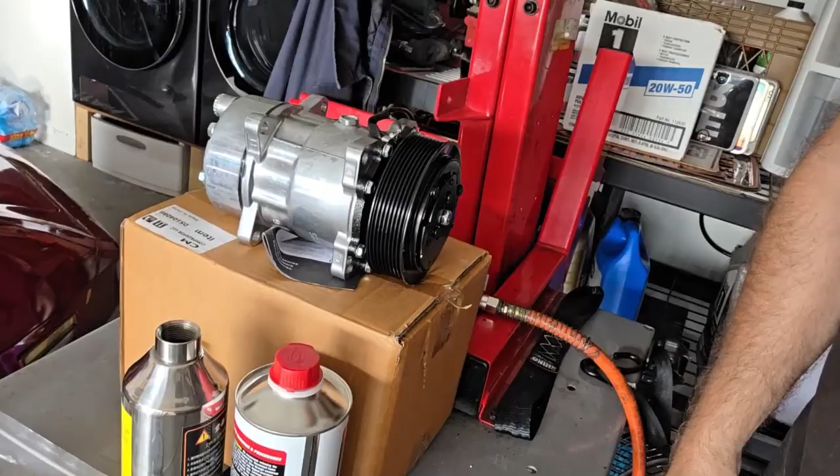Oh yeah, and we got some more stuff coming up. You notice I'm starting to accumulate parts. The AC compressor died, so I've got a new one. It's a Sanden 7H15, I think is the nomenclature. I had an SD508 on it, and it just couldn't take the RPM, and it crapped out. And so I've got a new 7 series Sanden going to go in.

What else we got? AC stuff, some minor bric-a-brac. So we'll have some more videos coming soon.

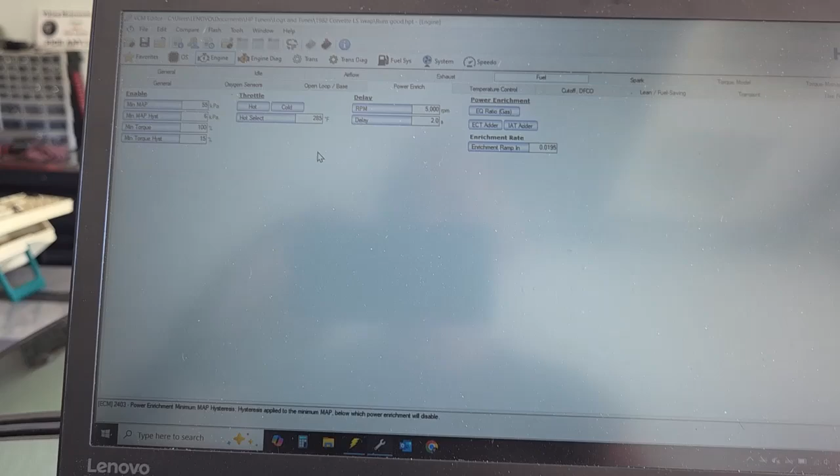Where is power enrichment? Coming in at 55 kPa MAP, which is fine. Oh, and actually you want to see this at 90% throttle before power enrichment was activated. And you want to run off the cold throttle enrichment table, which is the same. So this is the factory table from the truck. I had to get to 90% throttle before I was tipping in power enrichment at any RPM. So that means essentially I was running no power enrichment until I pegged the throttle.

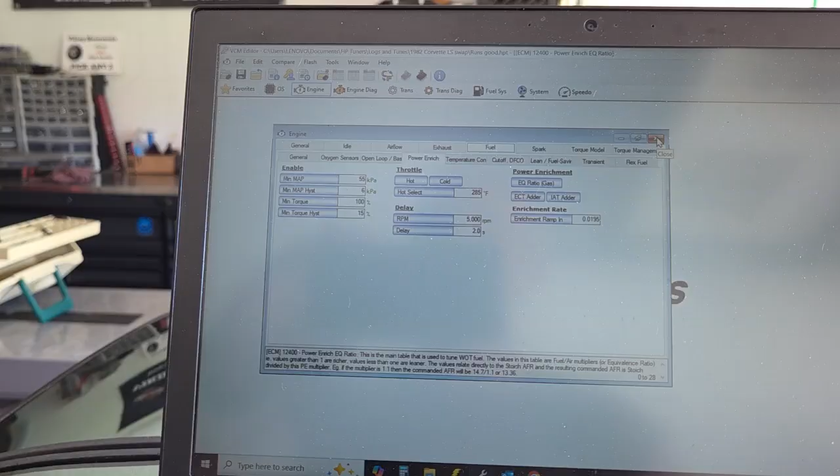And I had EQ set up, which basically is your mixture based off EQ, 1.48 up to 1.3, which will richen it up as the RPM comes up. My stoich is set to 14.2 because I occasionally run alcohol, ethanol-aided fuels here in Florida. You get it, and I don't want to worry about having to swing back and forth. If I run 14.7, then if I run alcohol-based fuels, it'll kind of run lean. And so what I did for the new tune

is basically you go in, and the MAF is still live here, but it's not going to look at it because I've disabled it. The way you do that is you go into engine diagnostics, mass airflow sensor, and have it fail at 100 Hertz. So basically, as soon as the motor starts, it's going to fail the mass airflow sensor.

And what you need to do in addition to that is go in, and these top 3 DTCs, 101, 102, and 103, all need to fail on first error. So as soon as you start, it fails the MAF, and it immediately reverts back to the VE table only. If you don't have this on first error, you'd have to cycle it twice. It just saves a lot of time to have these set to fail on first error. I also turned off SES enable, that way it doesn't turn the check engine light on. So if I have a different problem going on while I'm on a run, it'll still turn the check engine light on, but I'm not going to have it looking at me the whole time.

Going in their fuel, I turned off deceleration fuel cutoff. It doesn't enable to 284 degrees, so that'll never turn on. Power enrichment is still on. Long-term fuel trims are shut off. Notice in enable, minimum ECT is 284, so they're not going to. Long-term trims are shut off. Short-term trims are disabled. Short-term fuel trim in open loop is disabled.

What else we got? If you have catalyst protection on, you need to make sure that's disabled. I'm not running CAT, so that stays disabled on mine. So basically, if you cut off your deceleration fuel cutoff, you shut off the oxygen sensors, leave it in open loop, and you disable the MAF, it'll run straight VE.

And then when you go in and do a test run, do a log with it running off just the straight VE table, you can monitor the wideband variance and look and see where it's rich or lean, and then make your adjustments from there.

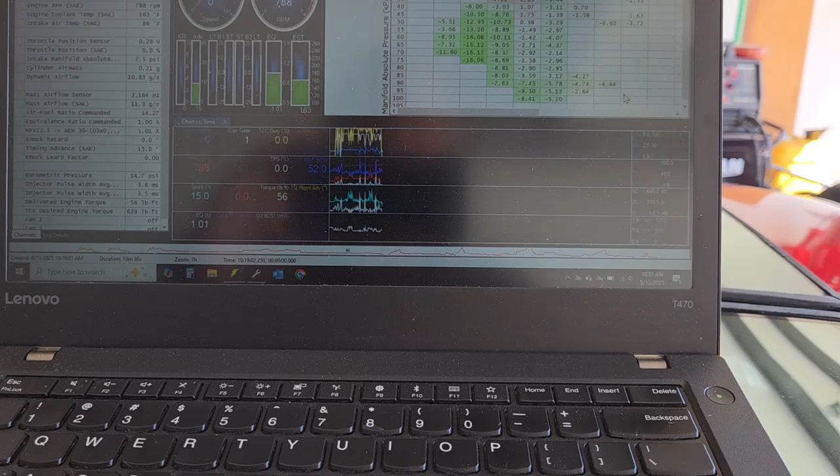So I've dropped the IFR and the injector flow rate tables down, and as you can see, I'm now way rich, which is exactly what I wanted. And this is right on that big peak on my VE table. And then of course it climbs up a little bit. Now I didn't run too high of an RPM because I didn't know if I was getting into any knock down the road, and I want to try and take this in stages.

All right, so I went ahead and moved inside because it's just ungodly hot outside already. So basically this is the log that's reading exactly like the VE table does. It's set up for MAP versus engine RPM at the exact same gradients and axis, columns and rows as the VE table itself. So we can take this data and transfer it directly into the VE table to affect it in the direction we want.

Since this is the first run with the new data in there, I'm just going to bulk all this in at the same time, and then I'll have to smooth the VE table out a bit because I didn't get a ton of coverage, but I'm pretty good up to 3,000 RPM. So these tails are going to show up, and there'll be big dips where it was too rich, so it leaned it out. So I'll have to go in and smooth some of that over, and then smooth these out to get up higher into the table margins.

And I'm not going to go into great detail about how to set up this histogram. There's enough YouTube videos on that already. Basically, you need to set it up like so. You'll see I've got engine RPM across the column axis, and then manifold absolute pressure on the row axis with the same gradients, the same steps as the VE table. And you can copy these directly in.

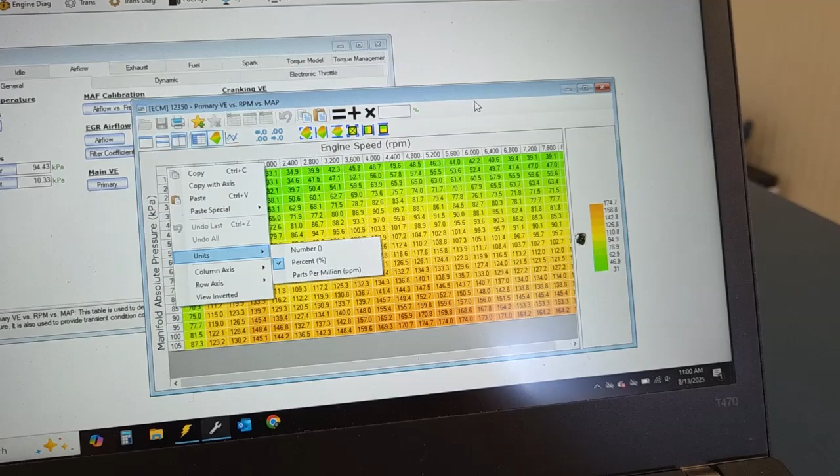If you go to the VE table, airflow, you can go right up here and copy labels. And it'll copy the exact same labels and same column data. So when you're looking at the log in VCM Scanner, you'll have stuff that relates directly to the VE table itself. You're not worried about doing any math or compensating for that.

And then of course I've got the filter set up to filter out any transients. So that way, if I'm on and off the throttle and changing throttle positions... What you want is a nice stable run when you go out for a log, because you want it to be in each RPM and in each cell as long as possible to fill the data up.

And if you click on counts, it'll show you how many times it pulled data. Oops, let me close that. So you can see I had 2,600 hits in that cell, 4,400. And as you get to the ends, as you're coming up and down in throttle, it'll thin out towards the ends. Like that only has 1, that only has 2. And so what you'll do is come up here and click on the corner, which will highlight the entire chart.

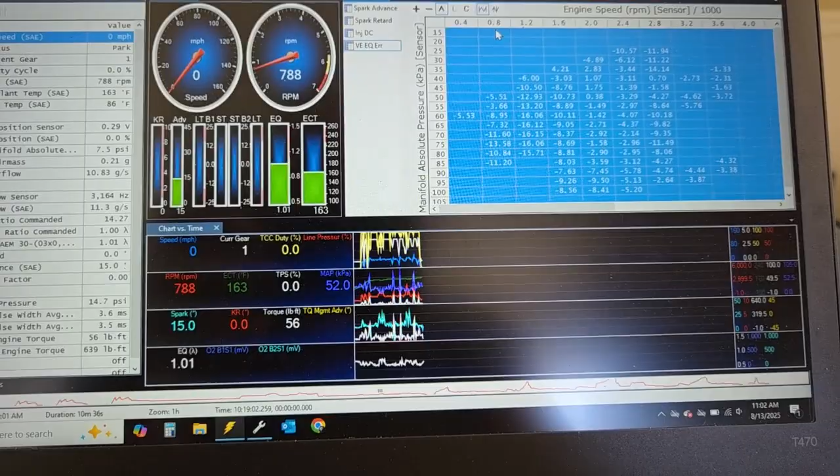Right click, copy, and then go to your VE table, and what you can do here is right click, paste special, and I'm going to multiply as a straight percentage. Another piece of advice is, as you start fine tuning and getting it close to 0 or 0.1 lean or 0.2 lean, you get it within 1% either way, consider the cell's done.

Once you start getting that close, you're getting down to 2 and 3% variance, then you'll want to multiply by half. That way you're putting small changes in. Because there's going to be barometric pressure changes and weather changes, humidity is going to be coming up and down. That's going to affect your reading. So you're never going to get your mixture variance, the EQ variance, to read zeros. There's always going to be some variance, so that's fine.

So once you get down to like 2 or 3% error in the VCM scanner log, you can call that done. So you'll want to move in smaller steps as you get closer to 2 and 3% variance. So you do multiply by half, and that would take the percentages from the VE log and only multiply half of that change to the table. So you'd have much more gradual changes, and you're less likely to have big swings up and down as your environmental conditions are changing, engine conditions are changing.

So I'm going to multiply this by straight percent because I know I've got to move a lot because I just changed all the injector data, and you'll see what it does to the table. Actually, what I'm going to do first is blow this out so you can see the graph change. So there was the table we started with, the 3D graph, and I'm going to paste special, multiply by percent. Bam. And you can see how much it dropped down that big peak and actually started to raise up some of that valley.

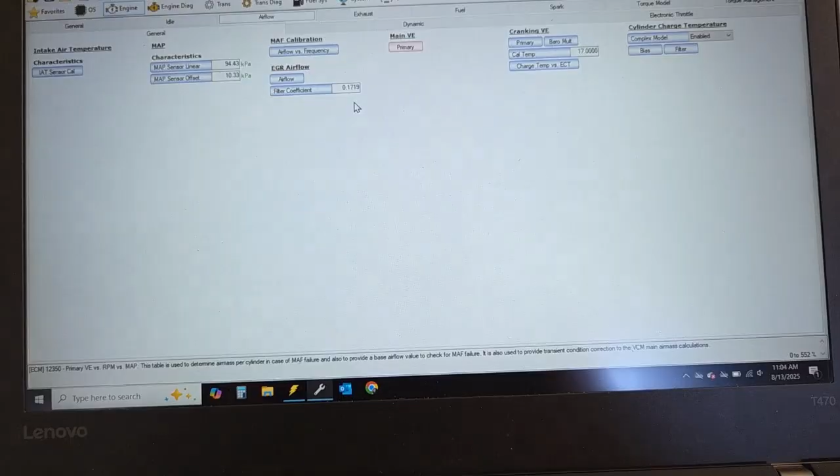I probably should have showed you this while I had that tune up. I'm going to close this for now and go back into the VE table in a second. But with power enrichment, I modified that to come in at 35% throttle. So as I'm getting heavy into throttle, it's starting to go into power enrichment. It just enables power enrichment to function. It doesn't mean it's going to enrich it up, because that's still going to be based off your EQ ratio at a preset RPM.

Oh, and the way I came up with this 1.15 on EQ ratio is your stoich, which is 14.2 I've set on this motor, divided by your desired power enrichment mixture ratio, which was 12.5. So 14.2 divided by 12.5 gets me 1.15, and what I want to see is 12.5 across the board. This EQ ratio of 1.15 is a modifier on the base EQ ratio. So this doesn't mean the EQ ratio is going to be 1.15. It means it's going to modify the stoich ratio as set.

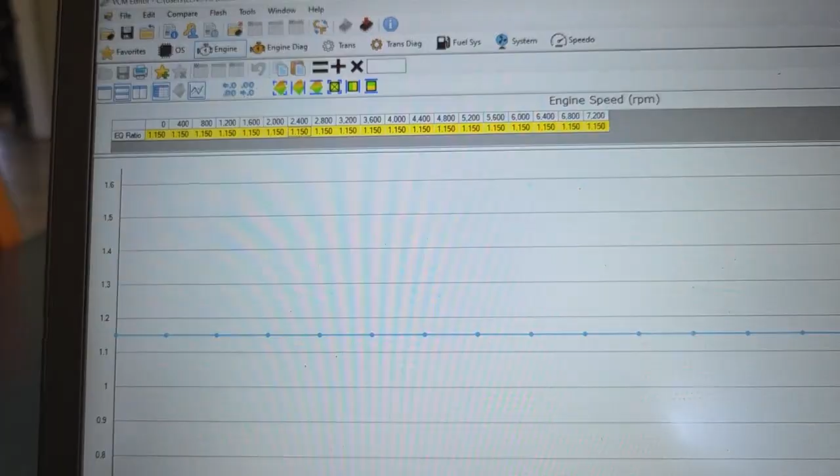So when I get into power enrichment above 35% throttle, it's going to kick in and go up to 12.5:1 instead of 14.7:1 or 14.2:1. And so that number may be different for you depending on where you have your stoich set, whether you're running alcohol or not. If you're running flex fuel with alcohol sensing, some of that's easier because that'll do the math for you. But I don't know whether I'm always going to be able to get ethanolated fuel. So I set it at 14.2, which kind of gets me in the middle.

All right, so now we'll go back into the VE table, and we've got all this chunky mess here. What you don't want are these big transitions, like a big hole here and a big jump here and a big hole here and a jump here. If you look on the chart where the pointer's moving, you can see what's happened. Here's where I just measured it on a log, and here's data that hasn't been touched yet. So obviously that needs to come down.

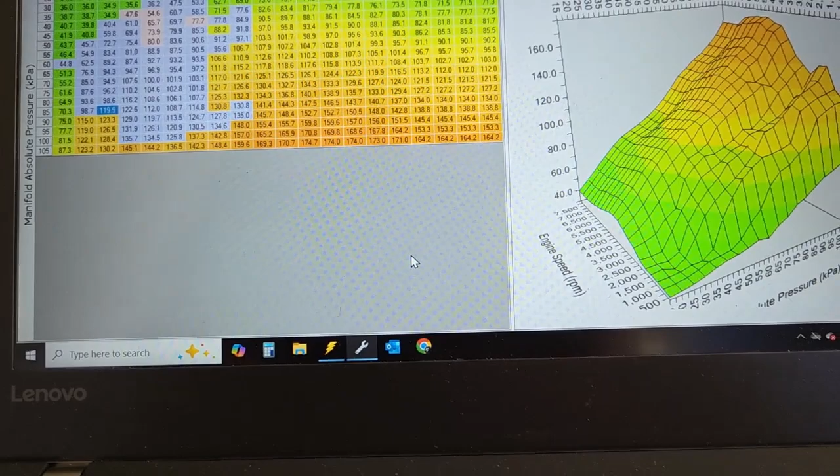So what I'm going to do is take a look and see what my percentage was like up there. 10, 15% at 1200. Let's say 12% at 800.

So I want to take 12% off at 800. So I'm going to multiply this group of boxes by 0.88, which will be a 12% deduction. And if you saw me key that in, let me go backwards. I think I dipped the camera down. So I'm going to go up here.

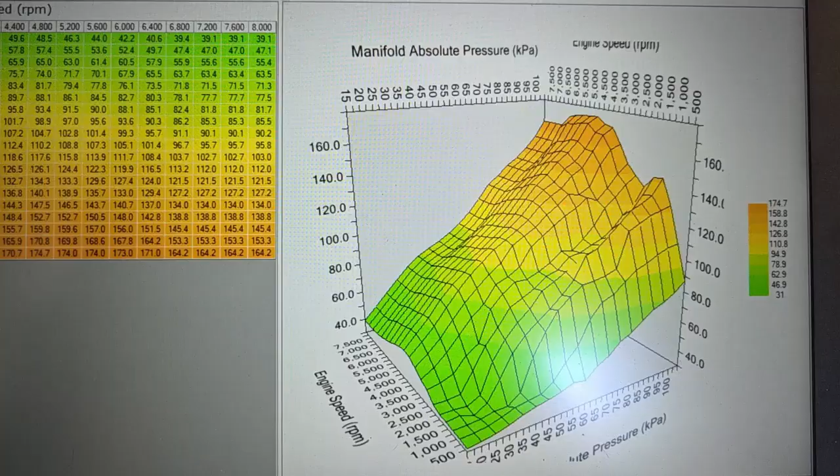I highlighted the 4 cells that I want to move, and I know I need to take about 12% off of that. So I'm going to go 0.88, which will take 12% off what it's starting from, and multiply. Boop, and that will drop that down. And you can see what it did here. It flattened that out. If I reverse it, I'll give you another graphic. Here's what it looked like to start with. And then multiplying it by 0.88 dropped it down in line with the one before it.

And the same thing with the cells before that in the next range, 1200 RPM. It looks like we were 15 or 16% rich. I'll take 15% off of that. So of course that's going to be 0.85. We'll go over here. And again, we'll see the chart drop down once I multiply it. Bam. So now we're starting to see more normal numbers down here. It's coming way down.

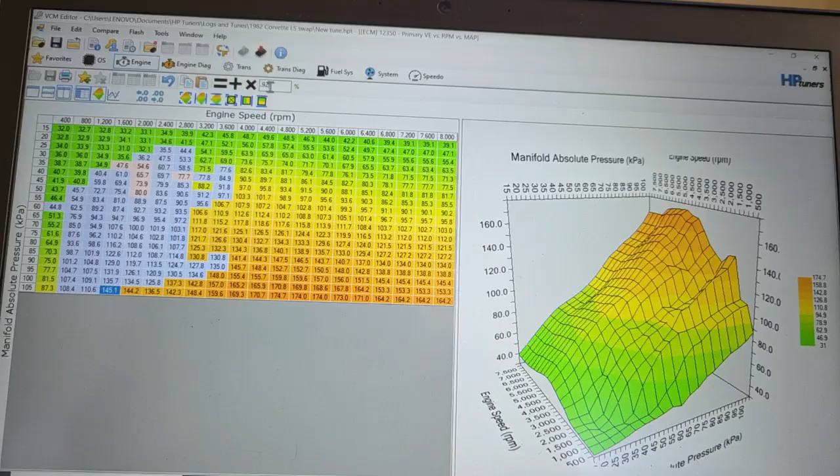And as I go back and do runs, some of this will come back up, some of it will go back down. 1600 RPM was down by about, let's say 8.5. Let's say 8%. Back this off so I can see over it. 2000, about the same. So I'm just taking 8% off of these guys.

And that top bar, I don't think I ever hit 105 and rarely hit the 100 bar. So those were kind of speculative. You look at the trend as it's coming up, and then I'd filter it in the next two. I'd carry it up and interpolate it up. And what do we got? 24 is about 5%. 28 and up look to be about 3% is probably a good place to be. So 5% and 3%.

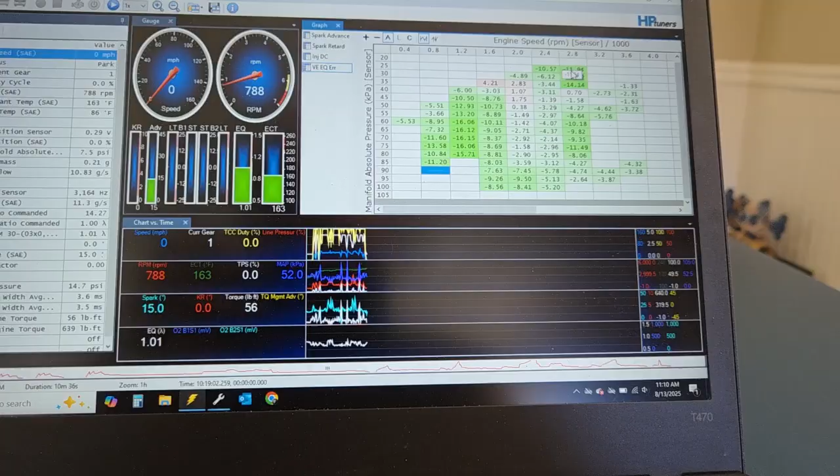So you see it's starting to drop that down now. I'm going to fill these guys in. Where else were we lacking? It looks like I'm probably going to pull 5% off the 400 RPM table and then down below here as well. Most of this is way rich up top. This would be in deceleration fuel cutoff range, so that would be kicking in and leaning that out anyway, but the less it has to do, the leaner it's going to run, the better fuel efficiency I'll get on decel.

So obviously 2800 RPM. And is there a bunch of counts? Yeah, there's a bunch of counts in that area. So we're going to go ahead and smooth those down. And so I just went through manually and filled in all these boxes here. And now I need to fill these in right here. Again, we're looking at about 3% at 3600 in that gap, and let's say 5% at 3200. So 5% at 32 and 4% at 36.

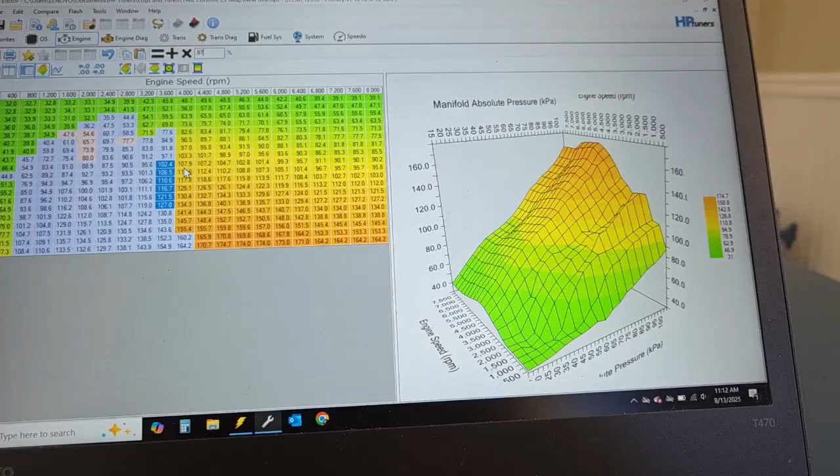I'm going to leave these fat for the time being. I may bulk drop some of the higher end stuff down because I think that's all going to come down as well. Let's go probably 97%, I think, because I'm at least 3% rich through here. So I'm going to fan that out. And then as I'm getting up to higher RPMs on my subsequent runs, I'm going to make sure I'm not running excessively lean, or I'll have to go back in and manually bump this stuff up.

And I'm just doing this particular column because it's easier to bulk edit them all. And I'm going to drop that one down. And you can see it's starting to fan down now. I'm going to take 3% off the whole rest of the chart. So we're getting down into the 160s now. So we're moving in the right direction. Ultimately, I may have to still go back in and adjust the injector flow rates down.

If anybody has any ideas on why I've got that weird valley still in here, and again, this still has to get cleaned up, but it's still a pretty pronounced valley in there, and reading way too high on VE, feel free to fire off a comment and let me know what you think.

And I think it's injector flow rate. I don't think it's starving for fuel. One thing I did always capture is injector duty cycle. And if you look, I'm getting nowhere near max duty cycle yet. I'm still only part throttle, but even at wide open, the most I had ever hit, I think, was 75 or 80% duty cycle, up towards 5,600, 6,000 RPM. It still had plenty of overhead as far as fuel flow, so it wasn't leaning out.

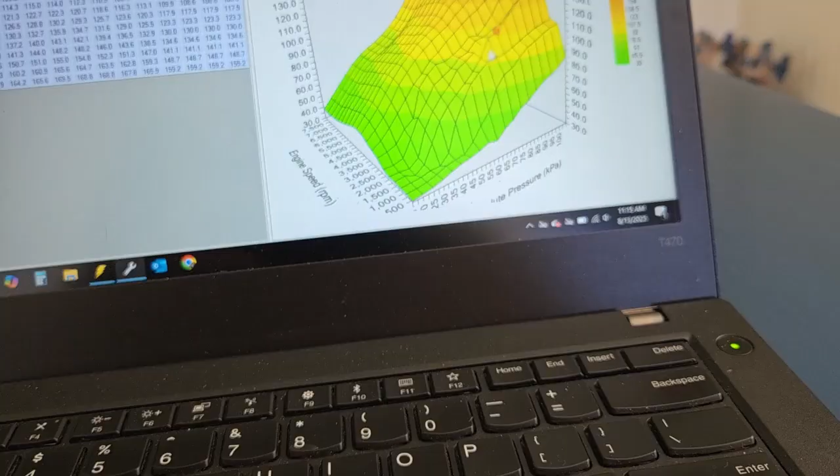So now we're back over here. We still have these big ridges on the top. So I definitely want to smooth these down, and we're looking at 1600 RPM up at the end, to 24, probably up to 3,500 RPM. And I'm just going to smooth these.

So I highlighted this section, which is going to highlight this whole area that got real data in that's kind of choppy. And I'm going to smooth this sucker out. And watch what it does to the graph. So it flattens out those big transitions, because that's what you don't want, is those little spikes that are back and forth in there. You want it to be nice and smooth.

That way, as you're on and off the throttle, you're driving, as you sit with steady throttle position, what's going to happen is as the car is speeding up and the RPM's going up, it's going to start creeping up through these cells. And what you don't want is for there to be a big transition where it goes from 87 up to 97; that would be a big jump right there.

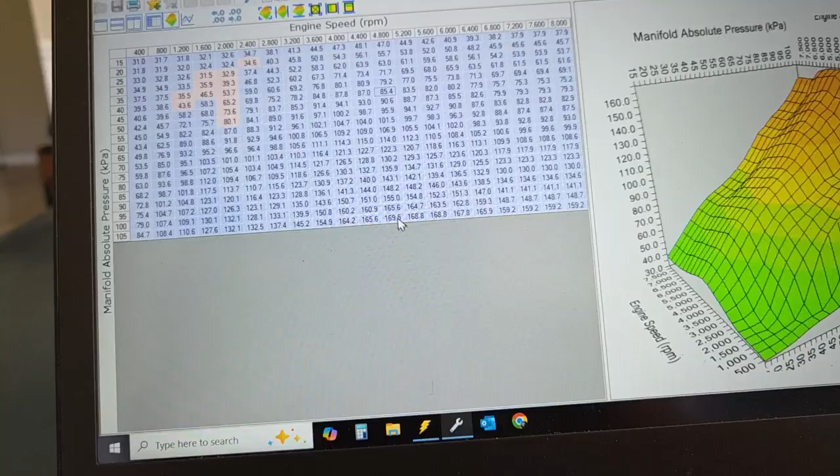As you can see, it's only one, and then it jumps by 3, it goes by 3, it goes by 5, goes by 2. As we're getting up into the power band, it'll start to flatten out. Like here, my peak fueling right now is somewhere around 4,800 RPM as it's getting up on the cam. And then once it gets up into peak efficiency, it kind of flat lines off, and then I have the mixture dropping off towards the end.

Because I'll never spin this motor to 7 grand with a stock top end on it. The most I'd spin it was like 6,500. So up to 6,500, it's still growing, and then my rev limiter would kick in and stop the ignition system, would shut it down. So I'm going to take this out. I'm going to load this back in, dump it into the ECM, take it out for another run, and rinse and repeat. And I'll touch back with you once I get it back out.

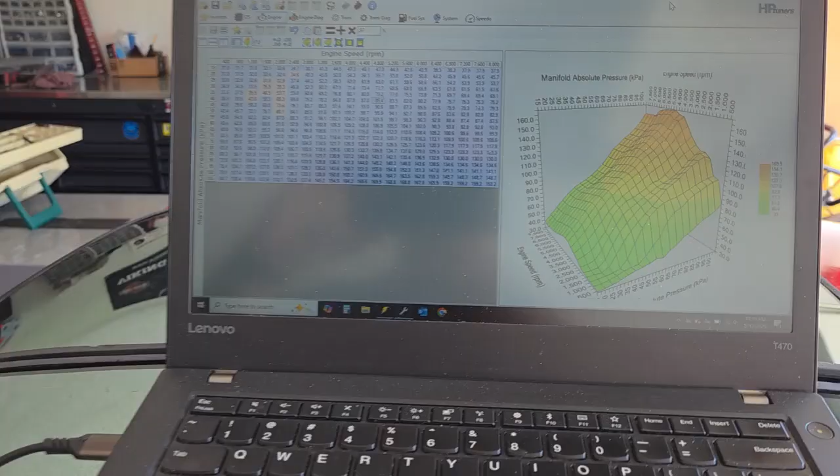Actually, I'm probably going to pause this right now, and then I'll come back in, and you can watch me upload it into the ECM, and then we'll go out for a run and see what my next log looks like. Alright, so we're back out in the garage, aka the hot box.

Something I neglected to mention before is that anytime I'm doing tuning runs, I always keep a chart, a histogram run up for spark retard to see if I'm getting any retard while I'm doing a tuning log. And I did get a little bit of retard right in there, 0.8 up to 1 degree of retard. That really isn't much of anything. I'm not concerned with that right now.

If I start seeing 2 or 3 degrees, then obviously I would go in and back off the timing table right there. There's lots of reasons that could appear. It could be false knock, could be a little bit of a lean spot in the tune. But as I'm going through the tune, you'll see it. That will move around. And as I get in higher RPM, I may see more, because of what's going to happen as I start bringing cylinder air mass back down to where it should be, my timing table,

as cylinder air mass starts to come down, I mean, I was hitting up at 108, 116, 112, and that's way too high. As I start to come down in the timing table, because it's calculating less cylinder efficiency, I'm going to start running up in timing. It wouldn't be surprising to see me start hitting a little bit of spark knock, and I'll have to go back and retouch the table.

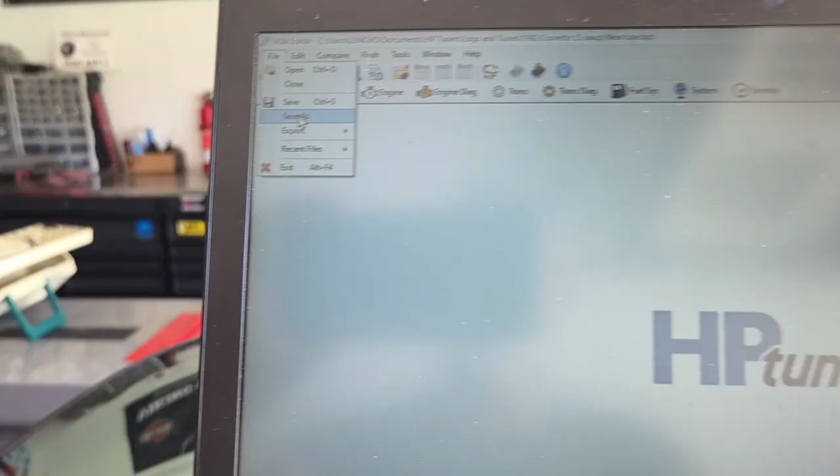But so I've got this VE table modified, and we're going to make sure we save this guy. And I'm going to make this new tune. I can't see what I'm doing because I got the camera up. New tune 1, so that'll be the first mod of the new tune. Now I'm just going to reach down and turn the key on. My USB is hooked up already. And I'm going to load the tune into the ECM.

It takes about 20 seconds to actually run the tune in, then we'll go through a cleanup, and we'll see.

Little old school Jethro Tull playing on the car radio, appropriate for an 82.

That's it. We're good to go. I can minimize this guy. And I'm going to get in it, start it up, and then I'll hit log and take it out for another run, and we'll see what it looks like when I get back.

Alright, so I'm back. It's about noon here, 12:30 in Florida, and it's getting too darn hot out. So that's probably the last tuning run for today. That was a good run, though.

I pulled up the log from the initial tuning run when I set it up with the new injector flow rate and all that stuff, and as you can see, we're way rich in most places. And I adjusted that, and I'm going to go pull up the tune from after the next tuning run. So I had made some adjustments in the last little piece of video. And here's what it looks like now. And as you can see, it's much closer.

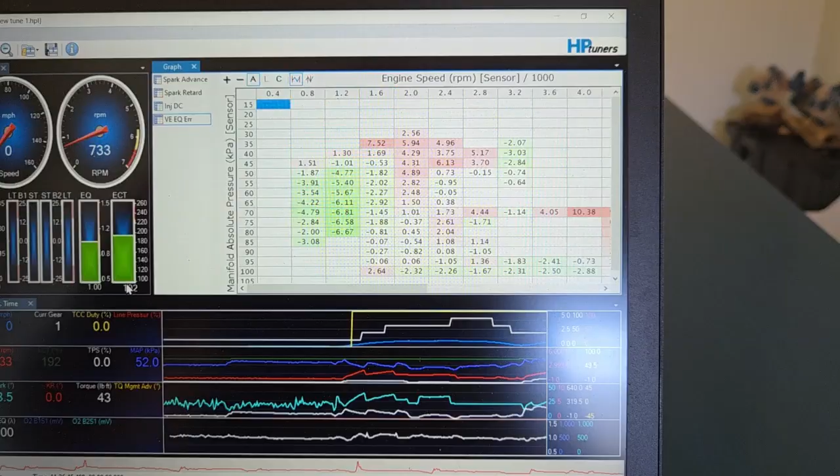We're actually a little bit lean in here. We're still a little bit rich in here. But for the most part, we're getting way closer. As long as you're down between 1, 2, 3% variance, you're fine, because your trims are going to take care of that, and you'll never get it perfect. So don't get OCD over it.

This run, since I had no knock retard going on during the last run, I spun it up a little more. I got to 5,200 RPM. I'm well into the point where MAF really is going to be taking over control of fueling, so I'm not overly concerned about redline in this thing during the VE tune, because I need the MAF. The mass airflow is going to be a lot more reliable at higher RPM.

When you're climbing at higher RPM, you're jumping those cells pretty quickly, and so MAF gives you a little more stability at high RPM. Low RPM, below 4 grand, it's way more dependent on the VE table, and it transitions to mass airflow from 4,000 RPM up. So below 4,000 RPM, you're pretty much running on the VE table. And this is all going to be part throttle, easy throttle around town, where you're really going to feel these little transition changes.

Like here, you wouldn't even feel this. From 1% lean to 0.3% rich, you're never going to feel that driving. So these are close enough, but you get big jumps like that, 5 or 6% on those two cells, that you'd probably feel. Where this is in the table tells me that this really is going to be deceleration or coast down. I do have this filtered out, so the only time it'll set any of the cell data is going to be when I'm at least 2% throttle.

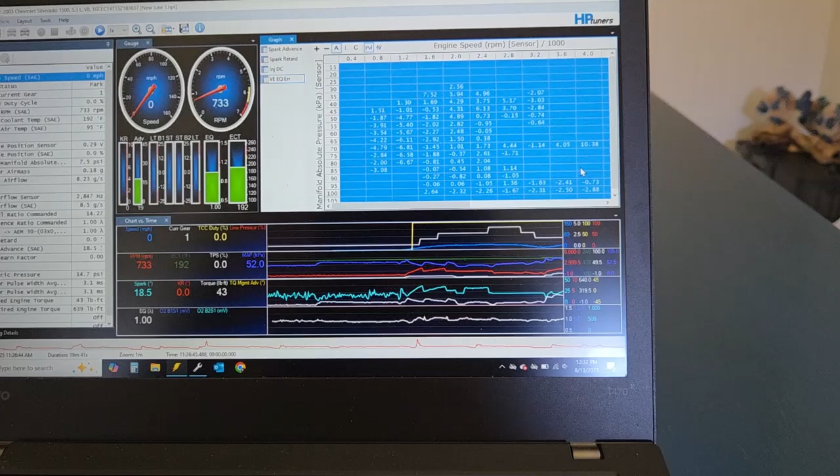copy. Oh, and by the way, when you grab this whole table, you want to make sure the sliders are all the way to the left and the top, so that you're starting at 400 RPM and 15. For some reason, what we've seen is that if you're like this and you click on the whole table, it may only grab the section you're looking at. But if you're all the way in the corner, you're okay. So let me make sure I copied that, because I've been yapping and I forgot.

So we're going to copy that, and we'll take it over to VCM Editor, and then I'm going to highlight the whole table and paste special times 0.5%. Now this will only change it by half of the variance.

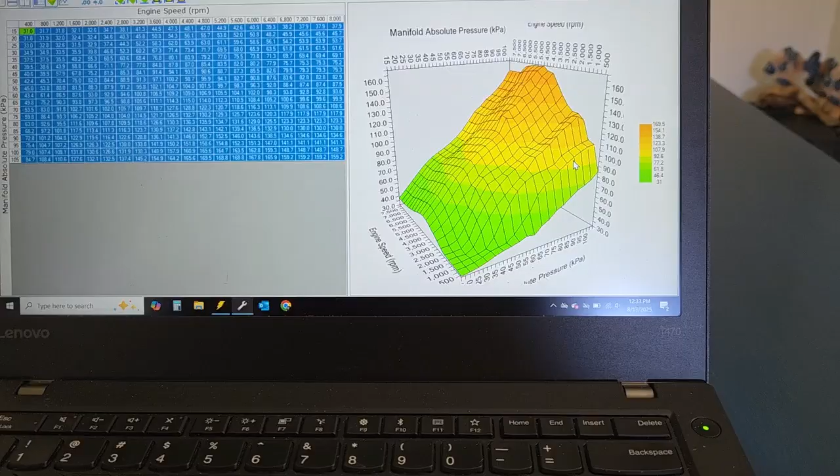So it allows you to creep up on it without introducing any potential bad data and big spikes in it. So you'll see a change, but not as much as it did on the last time. So we swung a little bit, brought some more of this peak down, starting to bring down some of this. This 400 RPM should definitely come down some. I don't think I hit any of those cells on the run. Now, see, 400 RPM is still empty, so I'll fade this down a little bit.

These came down about 2-3%. So on that last copy over at 0.5%, like this 4.2, it's not going to take out 4.2%. It's going to take out 2.1, half of that percentage value. And the same here, 4.89 lean, it's actually going to add back 2.45. So you kind of meet in the middle, and it lets you flatten out those peaks and valleys and not introduce any real bad data.

And of course, now I'll go in and smooth this over to take care of these big jumps. It didn't affect anything in here, but I had a 10% lean there, so it was adding fuel there. So we're going to have a bit of a gap here. So I'll go fill some of these in with smoothing. And there's that big void where it didn't change any of the cells. So I'll smooth these out.

So if I get any variances in MAP and it's reading 102, it's going to start pulling from this row. So I don't want to have these zeroed out or anything. I want them to be at least close. And then any general trends I see, I can go back in and fudge a little bit just to get me back where I want to be.

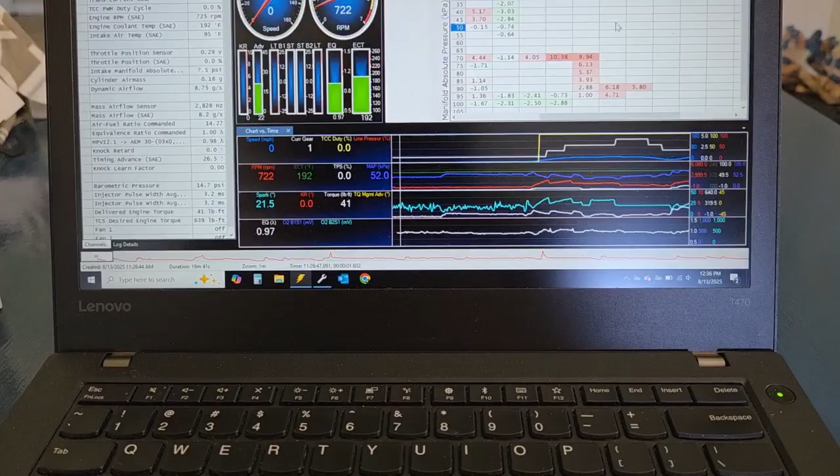Like here, it's actually starting to lean out in higher RPM, not by much, but a bit. So right now when I do the copy half, it's going to add 3% there, 2.9% there, and 2.35. So I may go back in and add another 2% in this area just to get me up, because I don't want it to lean out.

It's also worth noting that when I did this run, I had no spark retard at all. So I had no knock anywhere, even at wide open throttle. And I had a couple of pretty good pulls. What was I going to mention before?

When you're looking at these logs, if you want to see where you're spending most of your time, you can hit counts and see how many counts you set. This was an average run around town. A couple of stoplights, cruising at 40, 50, 60 miles an hour. If you look at the cell counts, you can see where you're spending your time. This is obviously idle and just off idle where I had most cell hits.

And then as I'm coasting and cruising, I'm right around in here. So this is pretty much where you're spending around town driving. Other than when you're on and off the throttle, coasting at constant speed down the highway or doing 45, 50 miles an hour, and then sitting at a stoplight, you're going to be in this range right here. You can see nice smooth transitions down. Just use some common sense.

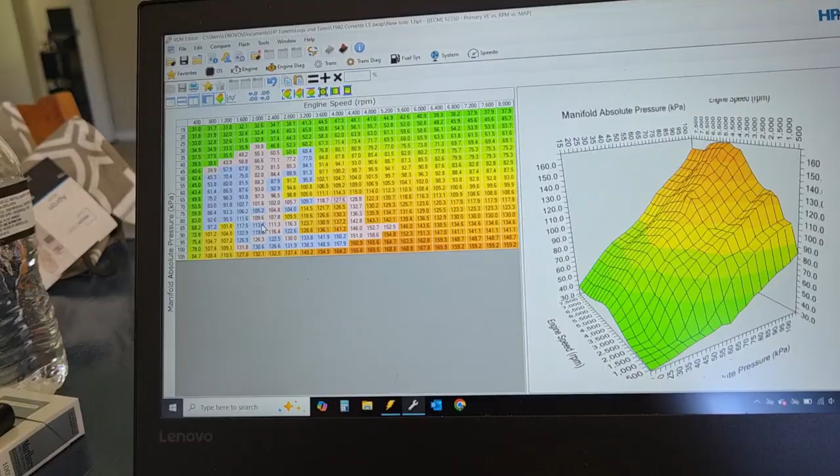You can look at the base map and see where you think it's going to gradually fade down and kind of ballpark it. You're never going to hit down here. You mash wide open throttle, you shoot up here. And then what happens is it runs across. As you're sitting at idle and you come off the stoplight and get on the throttle, it's coming up here. And then as you're in the throttle, it's going to be pinned up here, or up in here.

You're almost never going to see in here except on decel. And the only reason these register anything right now is because that's decel, but I just hadn't come back to closed throttle yet. You know, I very rarely go from 90% throttle to 0. You kind of feather back as you're shifting up and you're starting to back off the throttle a little bit.

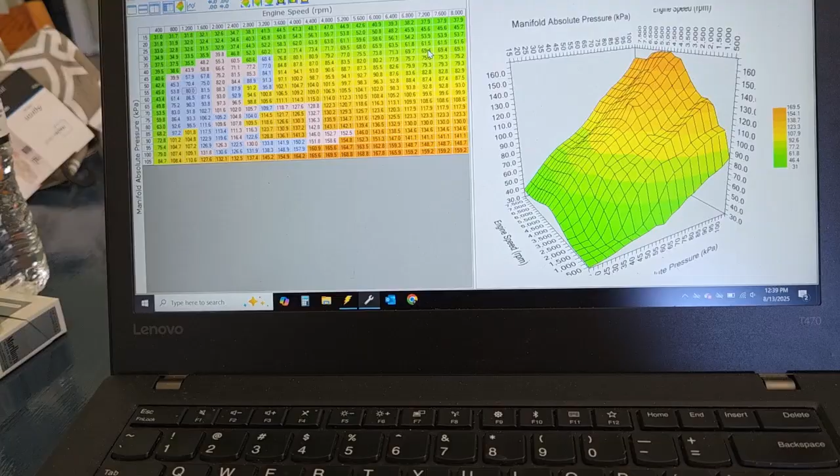So as I'm backing off the throttle from this big run, it's starting to track these. Because what happens is it revs up and it runs up to however high you rev it, and then as you back off the throttle, it'll start dropping back in this direction and come back to here again. So you're never going to see this over here, super high throttle and 7,000 RPM. I hope you never see that. That would be snapping the throttle closed at like 7,500 RPM, and then you might see here, but you'll still never see down here. So those are all just going to be cleaned up and make them look good on the graph. You want them nice and smooth.

And this obviously is rough, needs to be cleaned up, and I'm going to go do that right now. But it obviously looks better than it did before. I still have a bit of a dip here, but nowhere near as bad as it was before. What I can do is, if you can compare, I'll go back to my last map, and it'll pull it up in the same transition. Look at that. And now look at this.

And I'm not done tuning it. It's going to get smoother. But look at the difference in VE pattern. Major difference. So I think I'm definitely moving in the right direction with flow rate. I'm still a little high, and some of my max numbers are still in the 160s, 150s. Obviously that's higher than it should be. So I may still go back and reduce those injector flow rates at low vacuum even more.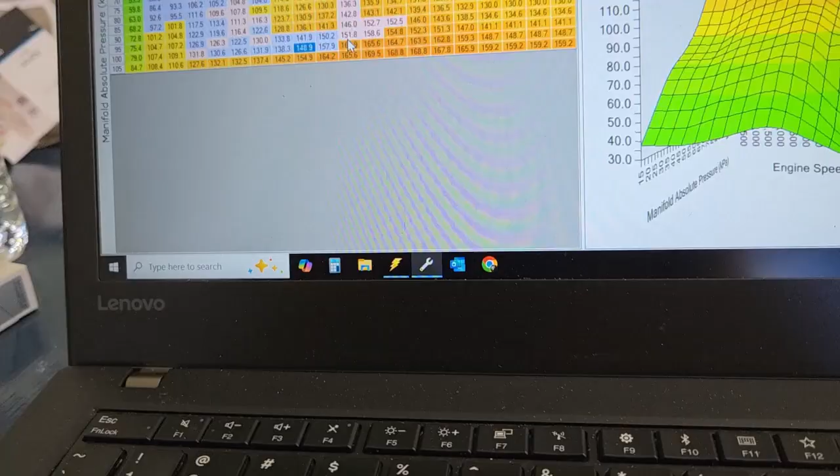Because this is not a vacuum referenced fuel pressure regulator. On the vacuum reference regulators that are mounted up on the intake, as intake manifold vacuum drops, it increases the fuel pressure, because when you don't have vacuum on the exit tip of the injector, it's harder to push fuel out, if you will. Or look at it this way: with vacuum applied at low RPM, when vacuum's the highest, remember this is pressure, not vacuum. So high vacuum is down here, low vacuum is high pressure. So it's an inverse relationship between vacuum and manifold pressure.

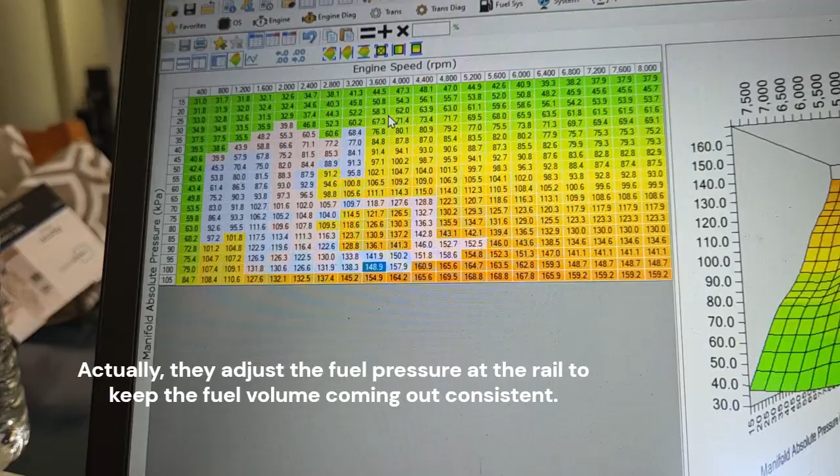So when you're at a high vacuum, you're sitting there at idle, or your decel, you've got a ton of vacuum on the exit tip of the injector, which is actually going to help pull the fuel through it. So your flow rate goes up. So vacuum reference regulators will actually compensate and keep the fuel pressure steady. And this is a non-vacuum reference regulator. So I will have a ramped, and I'll show you that.

Get out of here, you.

I will have a ramped fuel pressure rate. Where are we? Fuel, general. So flow rate versus vacuum. So at a given manifold vacuum, not pressure. So this is actually the low end of the scale, and this is actually the high end of the scale. What happens is the injector flow changes depending on how much vacuum is applied, because the vacuum helps pull the fuel through the pintle of the injector.

And that's where I started out before I modified it. These are 42-pound injectors, so I should see a 42 somewhere in the middle of the range here, and then it'll go up as engine vacuum goes up and go down as vacuum goes down. But what I did was tweak those numbers down, and it looks like it did that. So I may still need to come down some. If I'm not happy with the way it runs when I'm done with this retune, I may end up just getting another set of injectors with reliable data and going from there. Because again, I question, these are Bosch injectors, but dubious source, you don't know what you're getting.

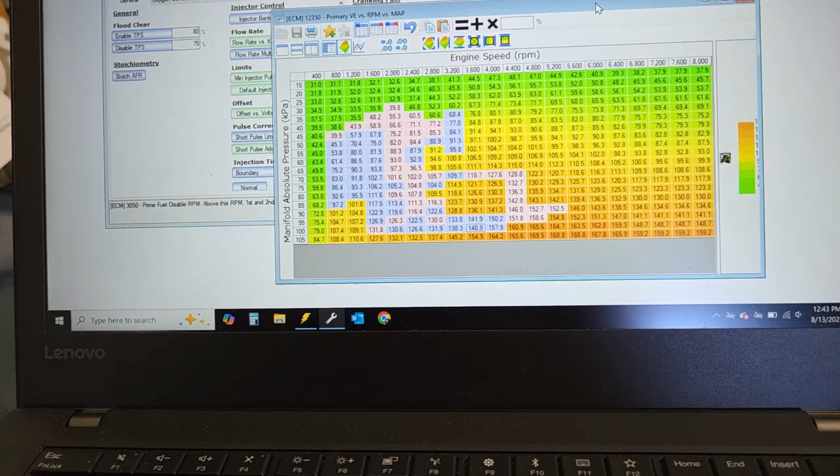It's getting warm already. It's a little later in the morning, but I think I might be able to get a run in, and I'll get ready to dump this tune in. You know, I was thinking about this, and I wanted to go back and clarify something. I went back and watched one of the videos I shot yesterday, and I wanted to explain something a little more clearly. This wasn't ever designed to be a tuning video. It was more just an update, and here's what I'm doing and why. But I want to make sure I'm clear on some stuff.

If you don't know, the relationship between manifold vacuum and manifold pressure really speaks to the difference between the conditions inside the manifold relative to barometric pressure or atmospheric pressure, which at sea level on Earth is like 101 kPa, and we're just about at sea level here. I'm in Florida, and so if you look at vacuum and kPa, zero vacuum would be atmospheric pressure.

As you increase in engine vacuum, as the motor's drawing in more air than is allowed past the throttle body or the carburetor, vacuum goes up because you're creating a suction on it. That's how the injector flow rates work off vacuum, and some other tables as well. But VE works off manifold absolute pressure. So pressure is the raw pressure in the intake, not relative to barometric pressure, but the actual, literal pressure in the manifold.

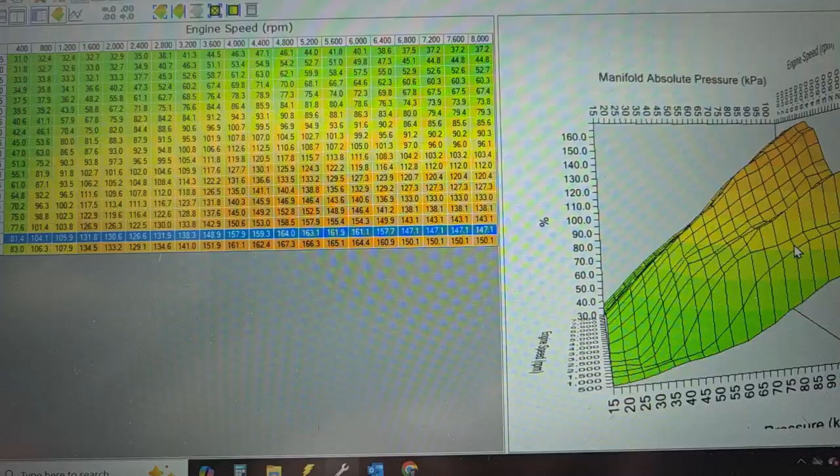I need to get back down, and you'll notice this is in percentage. So my numbers in each cell of the VE table are how much past volumetric efficiency I am, compared to the original, where it peaks at 95. So if I'm going to come down from 160, well, it's going to be a little more efficient at higher RPM because of the bigger cam and the intake work, but theoretically it shouldn't pass 100%, because it's not forced induction. It's only going to draw what it displaces at max peak efficiency, and I'll never see peak efficiency.

So really, what I probably need to do is cut down the higher end of the flow rate again to get these into a more manageable place. Cylinder efficiency on the factory setup at low throttle position, so highest vacuum, is actually higher than mine in terms of volumetric efficiency. But at high load, high throttle positions, low vacuum, I'm telling it it's way more efficient than it surely actually is.

So if I was going to take 162, 167 down to 100 or near that, I would probably have to take about 35% off the low end of this table, and then graduate that up, because I'm not too far off at the low end of the table. Low end of the table is pretty normal as far as a raw number being at efficiency at high vacuum.

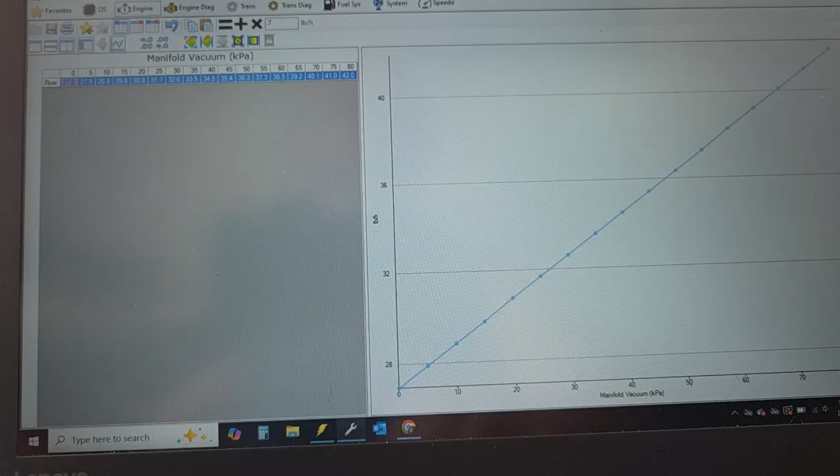And if I can I'll bulk chop this down and fade it. I mean, theoretically I could do the same thing. I could start at 100 and drag it down to, what did I run up to, 80? So that'll be up to 20. Oh yeah, so I'd have to go to 100 and reduce that by 30%, and then interpolate down to 20, which should relate directly to what I did to the IFR table. So I'll tell you what, why don't we do that and see what happens.

And I'm going to start at 105, because if anything, I'd rather take too little fuel out than too much. So 105, I'm going to start at my highest point. I'm going to multiply that by 0.7. And you can see what that did to the graph. And then we're going to interpolate up to, let me keep this a little rich down here. I can go back and tweak that, so I'm not overly concerned about that, instead of going all the way to 20. I don't want to make it too lean. That's how you get into trouble. Yeah, we'll go there.

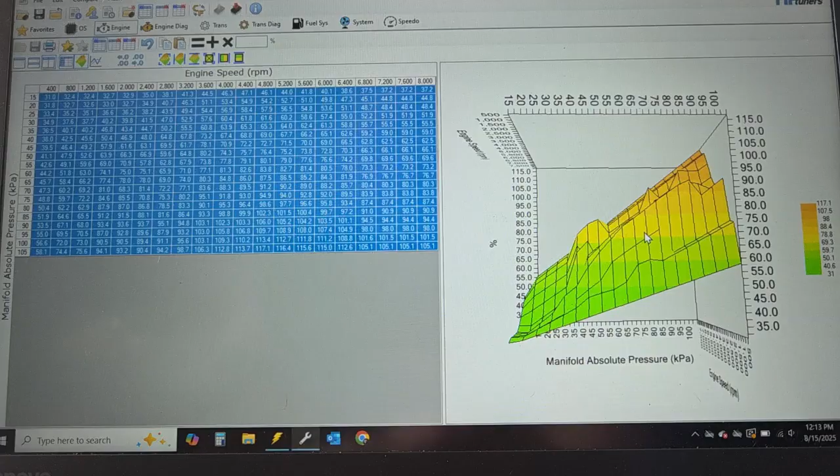Now, obviously, that's crazy mountain ranges. We don't want that. But now we're getting closer to the shape we wanted, a little higher and then more of a taper back. And as I log this and get up higher in RPM, I bet this probably flattens out some too. So now I'm just going to fill in the blanks. We can see what's been changed here. And so we're going to go ahead and add 10% fuel, so 1.1. And I'm going to pick these singles here, and it'll bring some of the dips out.

Come on now. At least this will put me in a safer spot to be driving around and getting a more effective run. How much are we off down there? Yeah, it's actually climbing up as we go on RPM until about 2800. So I'm going to bring this box up here as well. Right now these are corrected, but these are only lean by 4 or 5%.

So down here I'm going to guess, because we're going 10, 8, 6, 4, 3, 2, something like that. So I may add 3% more fuel across this little range, and then I'll go back and add some more in here, and some more in here. And that was 1200, 1600. I just want to add 3% here, so I'm going to make that times 1.03. I'll bring those up. I'll bring that up.

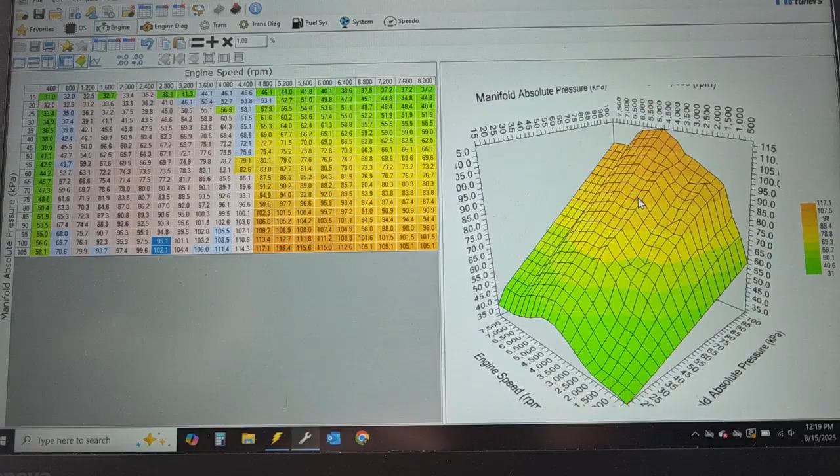That's a little too much. We'll go 3%. That's a little better. Next pair got to come up too, it looks like. There we go. And we'll start getting this sucker smoothed out. And let's see where it's at. We're still dropping off here, but we'll see. We've got time to run this. I'm going to smooth these out a little more.

There's a lot of peaks and valleys running up here, so we'll be looking at 1600 RPM and 1628 down to about 40 MAP, 40 kPa. So 1600 to 2800 down to 40 MAP. And I'm going to smooth these downward to try and smooth out some of those peaks and valleys. Actually, I'm going to smooth the whole thing. That way it'll take out some of the side to side also between those two. Yeah, it kind of levels them off a little bit. So now we're starting to see this middle's coming up. We're raising this hump up, and that's what should be happening.

And by all means, this is not the last time I'm going to do this. I've probably got a half a dozen or a dozen runs ahead of me just to get the VE table close, so it's within 1 or 2% in the cells, and then I'll go over to MAF. I'm going to dump this in and take it out for another log, and I'll touch back in a few minutes. Hey, before I go, one thing I want to do is make sure I save this. As you can see, I can put a note in here, cut VE table 30%. I'm going to trim that down, and this is now going to be new tune 3.

And I can compare this to the last tune and see what the difference is, so the tune 2 with the cut VE 30% was the tune I just logged on. And here's the difference between the two. So you can see where I brought the fuel way up here. The difference is scaled, so it's less and less of a difference as I get to the top. And you can see that reflected here. There's not much difference on the bottom. Brought it back up 3.8, 9.3, but down here I'm up 12%, 10%, 12.5, 13%. So it's a bigger difference in the meat and potatoes where I took that run out.

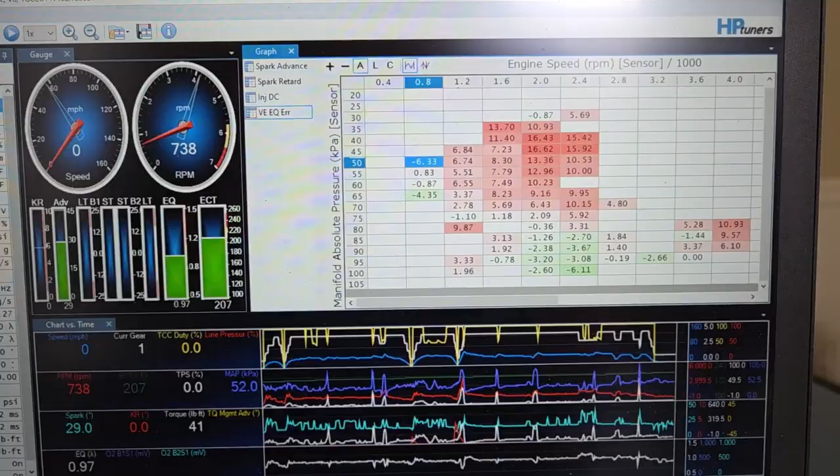I did have a couple of decent throttle pulls down in this range that's real lean here. You can see I actually had downshifted into third and was getting on and off the throttle from closed throttle and up, and obviously it's still pretty lean right down the bottom, which is kind of what I expected, because I was expecting to see this transitional hump down here, like we have in this row, but we don't have in the other rows yet.

So I'm going to copy this over, and since we're so far out, especially down here, I'm going to copy this over as a straight percentage and not go by halves yet. For the subsequent runs, I think I will start copying at a half percentage as I get more coverage too. But right now I want to try and get this closer to in line as quickly as I can to minimize how many runs I have to go out on.

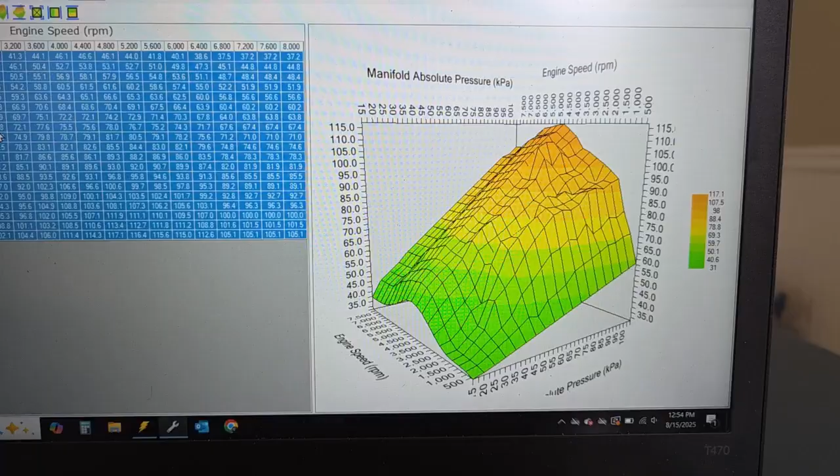So I'm going to paste special and multiply percent, and you can see it. We got a little more up here, we got a little down there. Let me first save this since I just changed it. This should be number 4, I think. Tune 3. And I can compare, and you actually don't have to save it first, you can just compare it back to the same tune.

So now we can look and see how much of a difference. Obviously we came a little richer in some spots because it was still lean, and we're still leaning out in some spots. So now I'm going to go through and manually fill in some of the blanks, like this crease right here. Where am I at? That's at 2800 RPM, down low. Yeah, so obviously we didn't get to 2800 RPM yet. So I'll richen this up preemptively to bring it in line with the others.

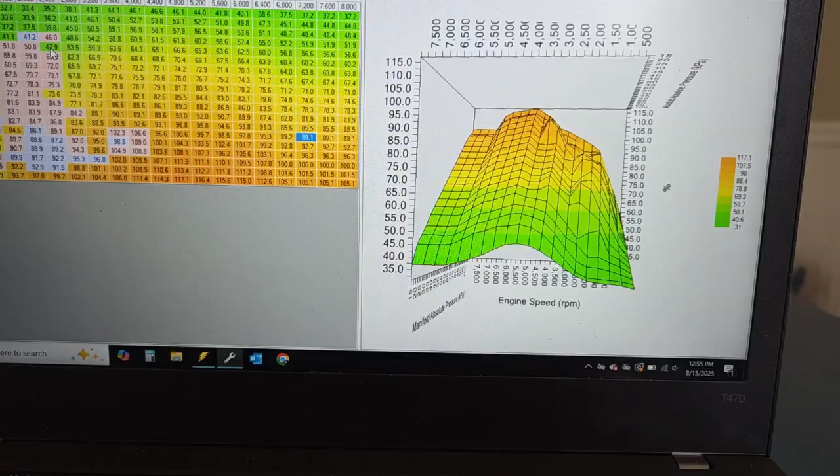Some of this is easier to do. I'm doing this one-handed right now because I'm holding the darn camera, but what you can do is highlight a whole section. And I can either highlight this row and interpolate across, or just smooth it, however you want to go with it. And obviously this goes from 46 to 47.9 to 63, so there's a hole right there. And we're at 24 and 35. Where are we? Yeah, right there. So you can visually see the hole on the graph. So that obviously needs to come up.

And so I'm going to go through and smooth all these over again. The only thing bad about smoothing is that some of these points are going to be correct. And when you smooth it, if I smooth from here to here, it's going to raise the lows and lower the highs. And some of the highs are accurate, so you chase your tail a bit. So I try not to smooth too much, and if I do smooth, I only smooth once or maybe twice if it's crazy.

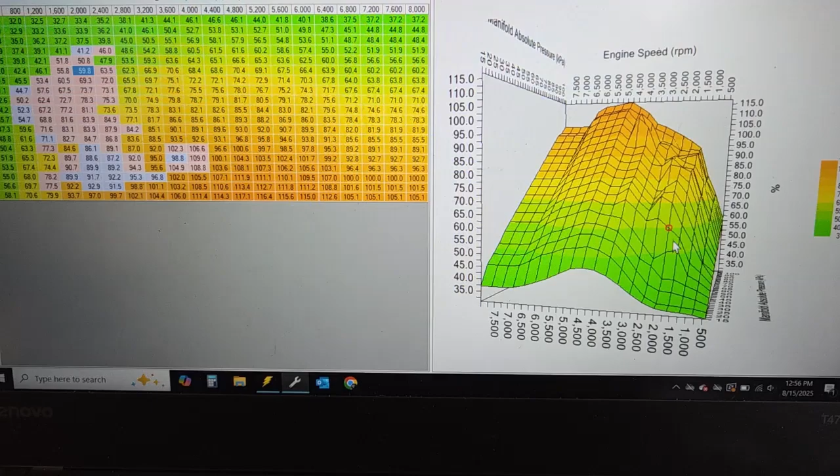But I'll do some manual first to fill in some of these big dips, because this big dip is going to suck down everything around it as it tries to smooth it. So any of these big holes and obvious deficiencies, I'm going to manually change, and then I'll smooth it at the end to take care of some of the imperfections. Let me get this smoothed over, and I'll show you the finished product, and we'll get another run in. All right, so 5 minutes of manual smoothing and a little bit of automatic smoothing, and here's what we got. I can get this loaded in the ECM and start doing some serious tuning.

So I'll wait till an early morning when it's a bit cooler out. I can go out for half an hour, 45 minutes, and get some good data in all these cells and start getting this filled out as much as I can. As you can see, I went through and enriched a lot of it. This shows up as red for the modified. If we look at the difference between the last graph and the new graph, you can see where I put most of the meat in. I did raise it quite a bit through all of this mid-range because it needed it.

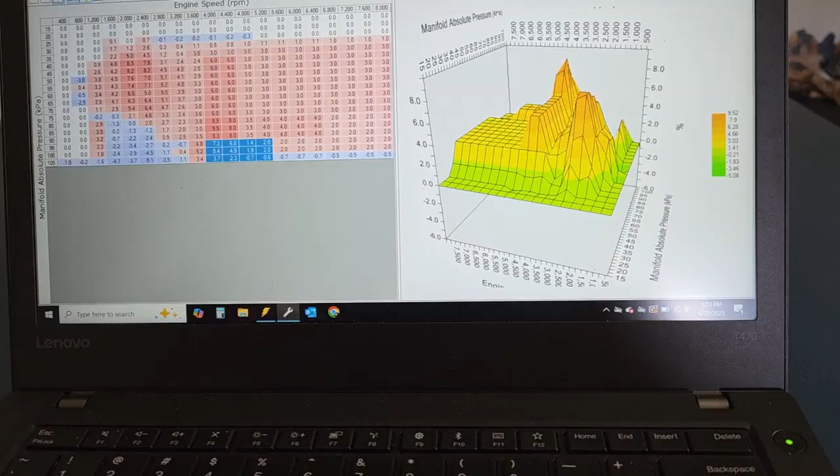And then there's right around peak power here where we're starting to really come up on the cam. I haven't done any pulls over 4,500 RPM, so I may need more fuel in here. I'm willing to bet I am. But for now, this gets me in a safer spot so I can start getting on it a little more and see what it's got.

Well, there's where it was. We get a side view, might give you a better idea of what's going on with getting away from the linear graph and going to more of a hump. And you can see it's starting to raise up. And similar to the OEM VE table, we're getting this ramp here, and then it starts to lay over and go up. And as I fine tune this, I'm guaranteed going to need some more fuel in here too. So that's going to bring that hump back to more where I think it should be. And we're still maxing out at about 115% VE, which is close enough for horseshoes and hand grenades.

Something else notable, let me go save this guy. Have I already renamed it? Yeah, it's in 4. Let me save my changes.

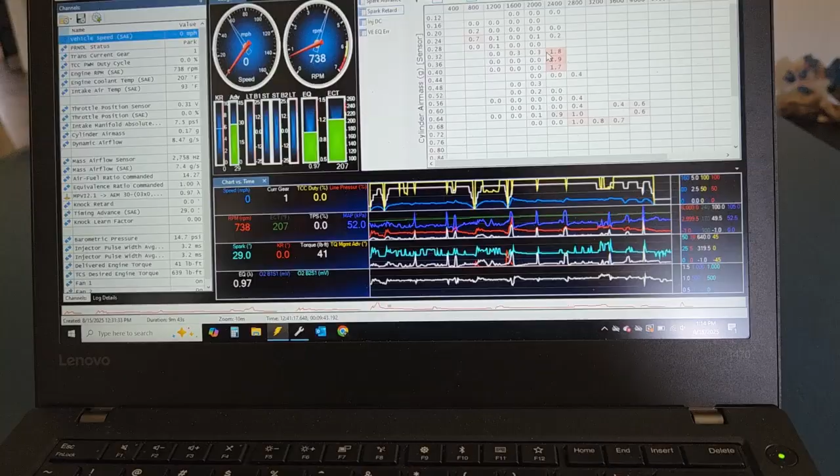Something else notable is that, of course, whenever I'm doing a log, especially if mixture is going to be way off, I'm always keeping an eye on knock retard. And I did have a bit of knock. And again, this is where I had shifted down into third. So I was getting in a decent amount of load right here, coming in and out of the throttle. And this was my shifting down into third at higher RPM, higher than it would be if it was in fourth and overdrive and TCC lockup, and getting on the throttle.

And so I'm getting about 2 degrees knock retard down here, which is 2,400 RPM. If you look on the graph, I was way lean in here. So this is going to be lean knock for sure. When I take this out on the next run, that's a little more duration. Again, I'll be watching this to see if I get any more. 2 degrees still isn't awful, don't get me wrong. If you see 6, 7, 8 degrees retard, you got a problem.

A degree or two, you know, what the ECM does is it sees knock and it starts backing the timing out. And when the knock goes away, it tells you how much timing it had to take out to make the knock go away. So if it's only pulling 2 degrees out, then the timing table's still darn close there. I may still need some more timing down here because I'm not seeing anything. So without getting on a dyno, you can't really tune timing to see where your gains in horsepower and torque output are falling off.

But what I'll do is I'll keep bumping the timing up until I start seeing knock, and then back it down 3 degrees from wherever I saw knock. If, when I start cranking the timing up at the end of this tuning cycle, I'm seeing 2 degrees retard up here, I'll probably take 5 out to give me like a 3 degree window. And this was also pretty warm too.

We had got a good operating temperature up. We're about 200 degrees. At one point I saw 207. So we were getting pretty good temp going up. And this is about right. We're sitting about 201 through most of this tuning log. Cooled down a little bit, up to 201, 203, and then that's right. And I pulled up in the garage and it was 205, 207 as it was climbing up, without the secondary fan on. The secondary fan comes on at, I think, 205. So it'll hit 205, 207, and then it'll back down to like 201.

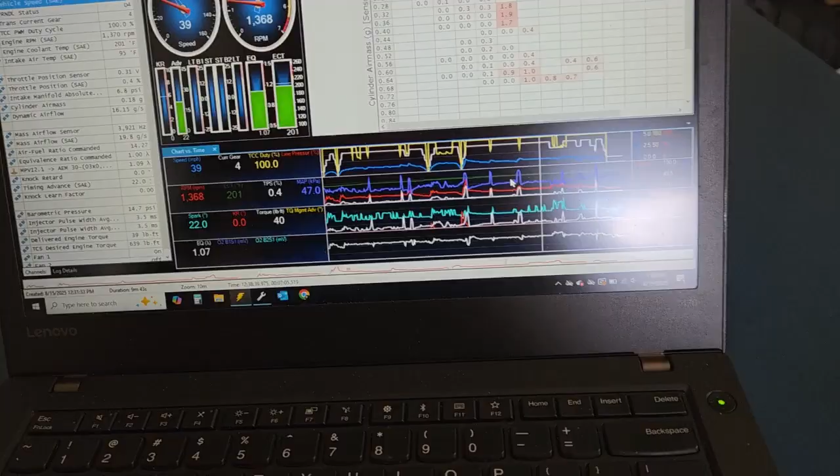And again, like I said, it's 90-something degrees outside. I'm sure it's hotter in the garage. And I'm out there beating on this thing and putting around town and trying to run the air conditioning. And AC has a minor effect on fueling. The ECM will account for it, but I'm not overly concerned with it right now. What I'm looking for is to get some averages and get in the ballpark.

And as I start going back and doing more fine-tuning VE logs, which will probably be at least another 2 or 3 or 4, I'll run without the AC on, and then I'll run with the AC on and see what kind of a difference it made and decide if I need to change my compensation tables for having the air conditioning on. I'll see how the air conditioning affects it, whether I have too much compensation in terms of airflow or too little, because the ECM will take all that in. It'll calculate how much torque the AC compressor is using up and compensate for everything else.

So that's dotting I's and crossing T's at the very end. But timing-wise, we're still pretty close. I'm not worried about this. Like I said, it was real lean right there, 2,400 RPM, so I'm not surprised at all. Once this comes up, I'll keep an eye on that. And now that I've got fueling back down there, we'll see if we start hitting spark retard again in here. I doubt we will.

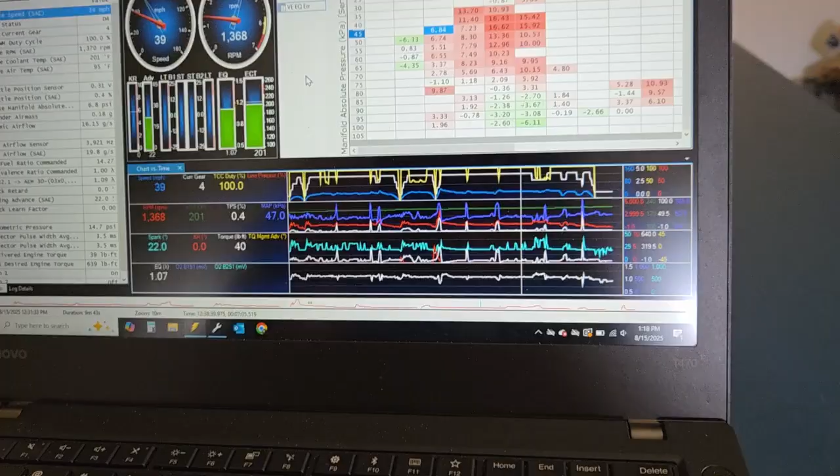And that's it. I'll touch base with you next cool morning. I can get out and do another run.

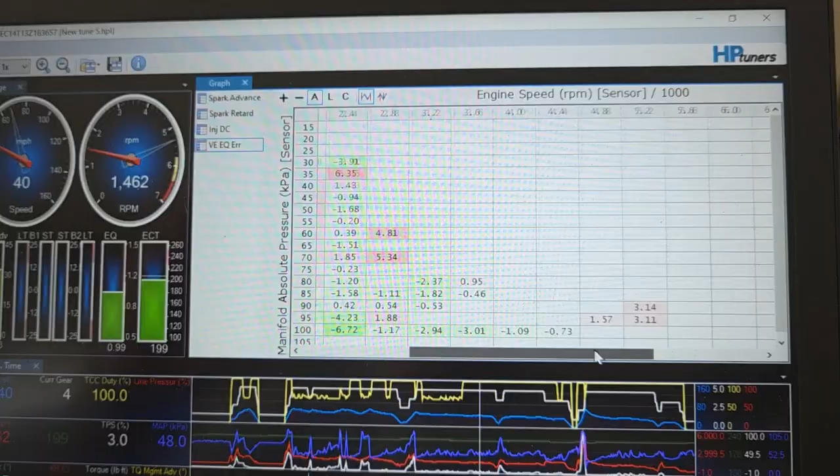But as you can see, and this is about a 20-minute log, the variance between cells is getting much smaller. I'm getting a little bit lean up here as I break over 5,200 RPM, about 3%. Now remember, you've got trims running the whole time you're actually driving, so they'll compensate for a lot of this. And then, of course, I haven't done the MAF tune yet.

Once you get above 4,000 RPM, the ECM is going to mix the MAF in increasing percentage for its fueling at higher RPM. So really, once you get above 4, the VE is just kind of like a ballpark, and then the MAF is going to start more and more accurately fine-tuning the mixture as you're up on high RPM. So I'm not overly concerned about running 6,500 RPM pulls to get the VE tight up here, because it's not going to be really looking at it as long as they're ballparked.

And what I've done on the VE table is I've taken the numbers from like 5,800 or 5,600 up, and they're pretty much flattened out, because the MAF's going to take over from anywhere above 4,000. At 4,000, it mixes in a small percentage of MAF with the VE reference, and then as you go up in RPM, let's say it's 10% MAF and 90% VE here, then it's 20/80, 30/70. As you go up in RPM, it's going to bias more heavily towards the MAF sensor.

So that's why we're not overly concerned with running dyno pulls up to 6,500, 6,800 RPM and getting the VE table tight up here. And again, you'll never see this. This is all decel. This is what happens when you slap the throttle shut after a pull. You'll populate these, and they're going to be way lean, which they should be. And then, of course, DFCO, deceleration fuel cutoff, is disabled right now, so you're not seeing any of that yet. That's going to cut fuel pretty much on hard decel.

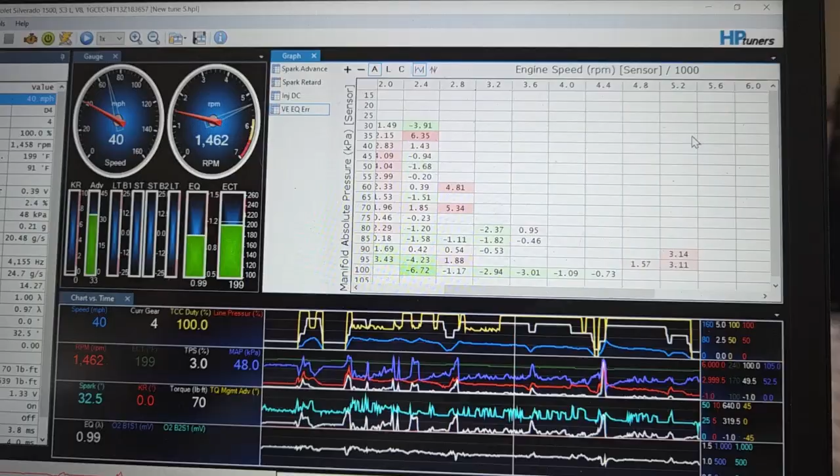So, I wouldn't be worried about this being too lean in here, because you're not going to be under throttle in these areas. Again, what we're primarily looking at is driving around town. This is idle, obviously. Let me get the last cell. So this is idle, obviously sitting around. So I took a little bit of fuel out here, added a little bit up here. But if you look at the variance, it's not much. This cell way down here, closed throttle, real low idle, is a little bit rich. So I did take like 3% off of both of these.

And then here, 1,200 and 1,600 RPM, you're idling down here. And then as you throttle in and it starts to transition, it'll lean out as you're opening the throttle. So this is fairly expected. So I bumped the fueling up a little bit in here, just so I don't get as much of a lean condition under tip in. Although driving it, you don't feel that at all. So really, this is just the wideband and the ECM catching up with throttle position right here. And then I added a little bit of fuel in here.

And then I balance it out a little bit. But you can see the vast majority of these variances are really small. Your trims are more than capable of compensating for that. And what you don't want, cell to cell, as it's transitioning through the cells and you're accelerating or decelerating, what you don't want to see are big transitions.

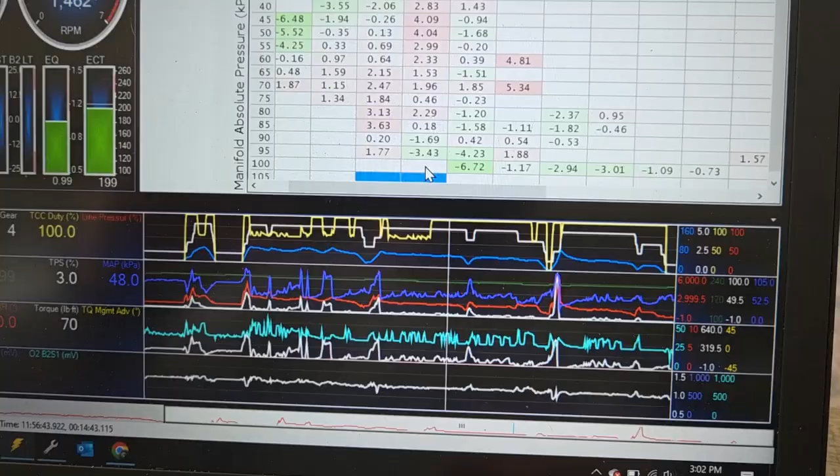Going from 7% rich, and let's say this one was like a -7, like a 14% swing, because what's going to happen is the long-term trims obviously take longer to adjust, and the short-term trim only has a certain range of motion. It can only go 25% plus or minus. So if you were to have like 10, 15, 20% variances cell to cell, that short-term trim is going to be swinging all over the place, and you could run out of short-term trim movement, and you'd end up with an overly lean or rich condition because the long-term has swung it the other way.

If your long-term trim is at 20% positive, because the cell is really lean, and you go to the next cell and it's a rich cell, the short-term trim only has 25% swing to compensate for that. So the long-term is still going to be at 20%, and then 19 and 18. It's going to gradually drop off, and the ECM won't be able to compensate enough with the short-term trim, which is your fast actor.

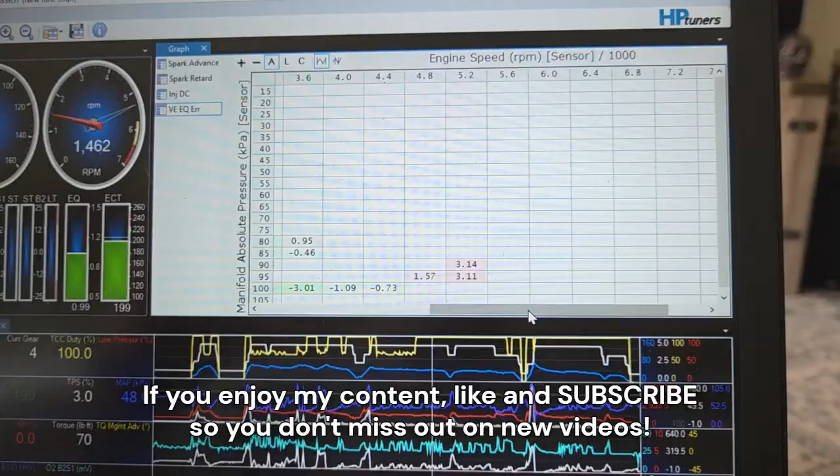So we're really almost done here. This was about a 15, 18, 20 minute run with a couple of wide open throttle pulls. Ended up with about, I don't know, 5,000, 6,000 counts, which is fine for VE table tuning and for this motor. And some of these cells don't populate up here because of the filters I ran on the scan. So when it builds this histogram, it's going to take out anything that it feels was within a transient.

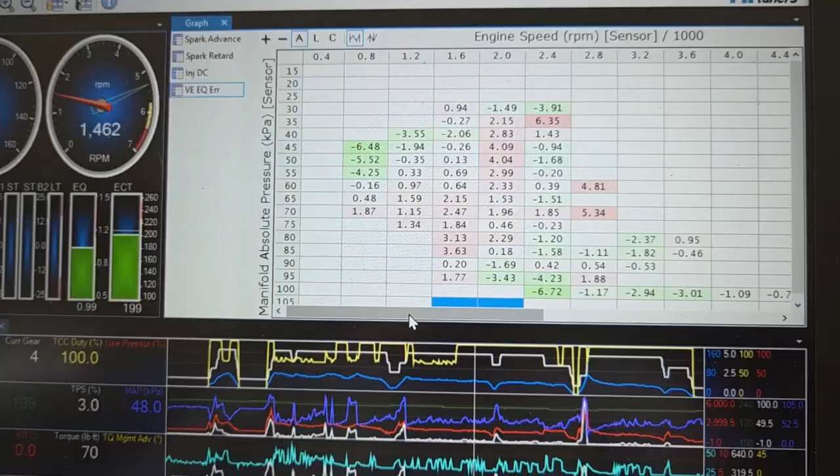If there's too fast of a motion on the MAP sensor or the mass airflow, and I'm not using mass airflow in the tuning right now, but I do have mass airflow up here so I can track it and use that in the filtering to take out any transient. So big, heavy, real rapid throttle changes, the ECM is going to take a hundredth of a second to catch up, and the same thing with the wideband. So you want to filter out any of the real quick throttle changes. So I'm driving in relatively steady throttle positions, except the wide open throttle pull was pretty heavy, but still it was gradual enough that I tracked it all the way up to 5,200, 5,600 RPM.

And that's it. We're really close. So I'm gonna load this. I've rewritten the VE tune, and you can see the new graph is getting exactly what we wanted, what we saw from the old general shape, which is it comes out pretty gradually. You're at most fueling up here, and then it steps off pretty steeply as you get to the other end. And as you can see, my numbers are much closer now. 117.6 is the highest. And so that's close enough, we're good.

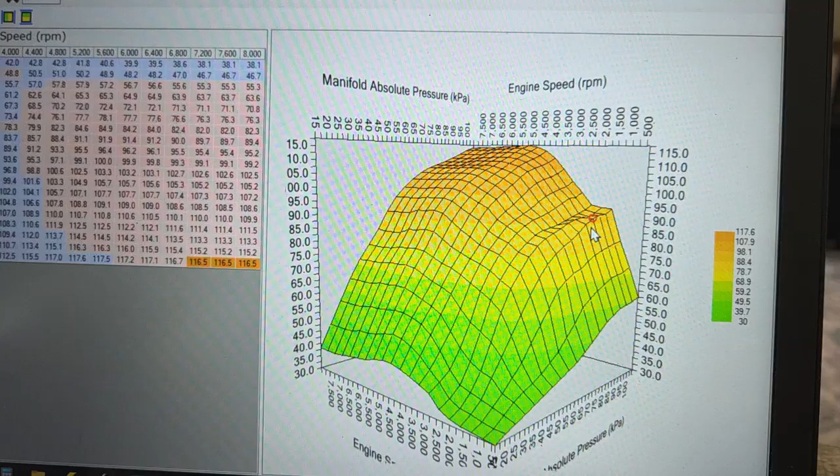And you can see, obviously, I've done a lot of changes here to try and smooth this out, and I've done some smoothing as well to try and filter it. I'm still a little interested in this step right here. It's a pretty sharp lip at 1600 RPM. And I think, again, this is my lean tip-in. So I'm stepping on the throttle, coming out of a light under reasonably hard acceleration, and you're up to 1600 RPM pretty quickly. So I think my lean tip-in is making me want to put more into that ridge at 1600 RPM. But my big valley is gone, the big peak is gone.

That obviously could be a little smoother, but I want to take this out for a good long run. I'm going to go out for half an hour, 45 minutes, probably tomorrow morning. Take it for a big long cruise, so that way when I'm running the scanner, I'm getting a lot of counts in these cells. I'm pretty good right now. Again, you can see this is where idle is. This is cruising down the road, 40, 45 miles an hour in overdrive, and then up at 55 or so for a while cruising.

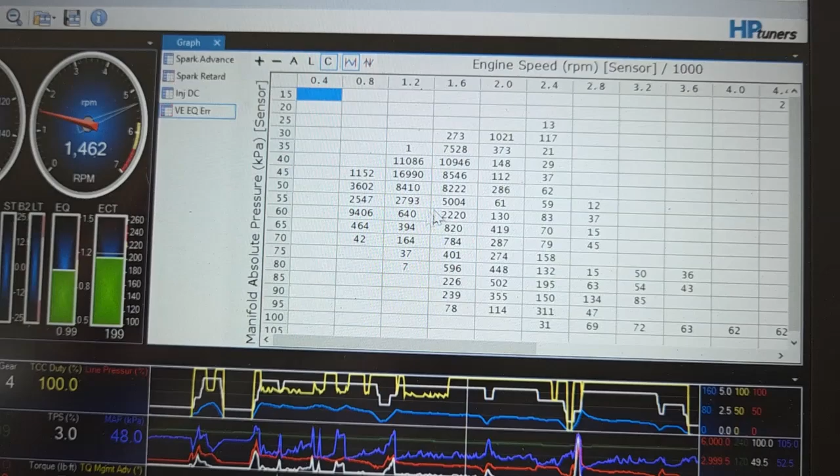You can see where the bulk of the cell hits are happening, and this is where you're spending most of your time while you're driving, is right in here. And then acceleration, you start to see these. This was a little hard acceleration, so I got up at lower RPM. I was getting to higher MAPs, lower manifold vacuum readings, because it was a little harder in the throttle, but it only happened once or twice, so I didn't set that many cell counts.

And then as we're coming up, the vast majority of acceleration was happening through here. And then of course, in here as we're driving around town, coming up stoplight to stoplight, and then the wide open throttle pull where I punched it here and it dropped to 100 MAP, which is 0 vacuum, and then it shot up at wide open throttle the whole way up. And I think I did that 2 or 3 times. So you can see we're getting decent cell counts.

So really, this is tune number 6 going in. I've done 4 VE logs, and this is the 4th new tune going in. I've got maybe one more in me because this is pretty clean right now, and I'm ready to go on to mass airflow. So I just want to get one good long drive in, like a 30, 40, 45 minute run through a variety of parameters. I may take it up on the highway and get on it a bit, and just get lots of cell counts in all these cells and see whether it's smoothed out enough or whether it needs any fine tuning, and then I'm ready to go to MAF.

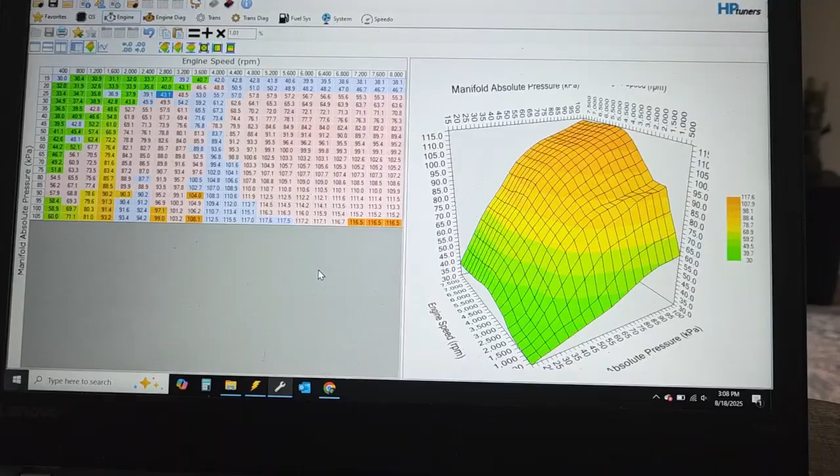So really, if I had been doing this on a customer's vehicle where I was under a time constraint, then easily it's in a day or a half a day, at most, and then go back and do the MAF. The MAF's only going to be a couple of runs, and that's pretty quick to iron out. That's probably 2 or 3 logs and it's done. And then go over the timing table, see if I can find any more juice in it, and then I'm going to be done. So I'll run 1 more log tomorrow and come back and look at it, and then we're ready to wrap this up.

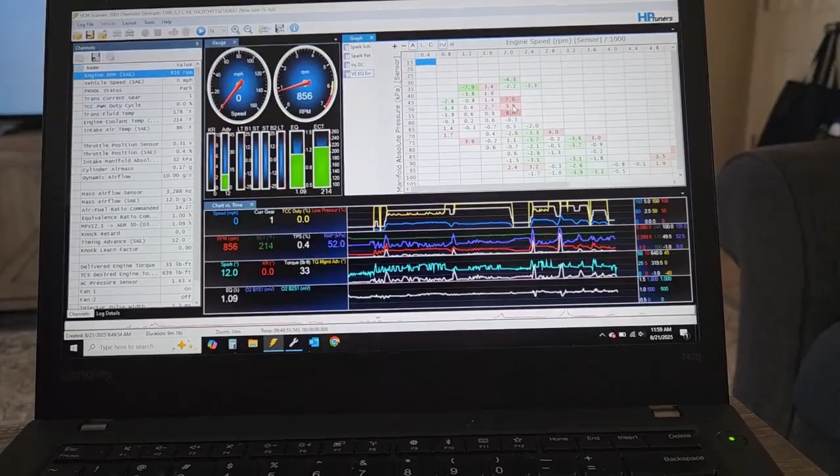All right, so just came back from a run, and I think we're pretty much done with the VE side of this retune with the new injector data. If you look at the log, I've got a couple spots that are a little lean. Those are in decel. I'm going to bump those a little bit. Any of the riches, really, we're only talking about 2 or 3%. And again, once you get below 4 or 5% variance, then you're good. You've got short and long-term trims that are going to compensate for any transient leans and riches that happen with engine temperature and air temp variations and fuel octane variations and all that stuff. So we're getting really close in here.

So I may touch just 1 or 2 of these, bring this down 1% maybe. I don't want to take this down a full 3%, 2%, because it could just be happening to spike a little bit high. But I'm getting pretty consistent. I've got good counts in these cells. Most of them are over 100 or close to 100. I've got good cell hits, 25, 66, 73. See, there was a 7 right there, and that disappears out of my graph here. So I wouldn't trust data with only 7 hits on it, but I get up 20, 30, 40, 50 hits per cell, and that's pretty reliable data for this particular place in time.

So I'll tweak these a little bit, take a little bit of fuel out here because that's a little high at 8. Most of these are really close. It is starting to look a little bit lean at the top. I see it increasing. Here's a little rich, a little less rich, a little bit lean, a little leaner.

So I'm going to bump this up here a little bit as well. Now, once you get up on higher RPM, again, I'm running mass airflow and speed density, a mass airflow tune that includes the mass airflow and the VE table. So it's going to run off dynamic fueling, which means it's going to use the mass airflow increasingly more as the RPM goes up. Because up here, it's much more stable.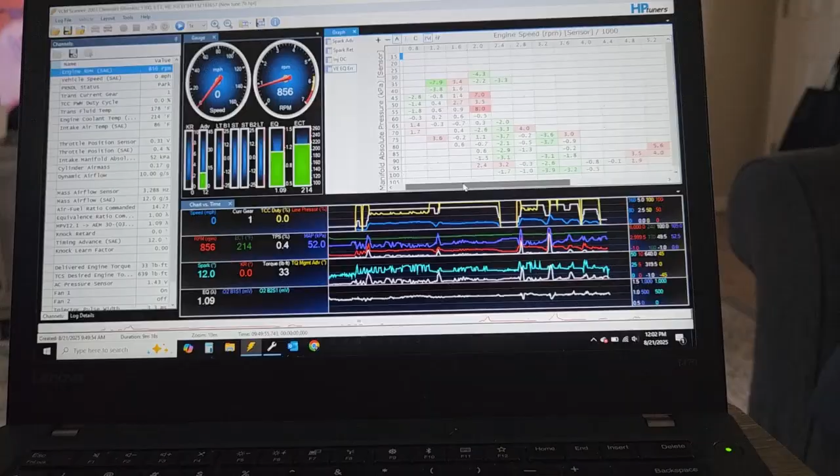And this was never designed to be a how-to video, just kind of like a ride along, but there are some little pearls I want to share with you. So I'll mix these a little bit, and I've already gone up and changed the tune and updated it, and as you can see the difference between the last tune I had with the old injector data and the new tune now, as far as the VE table goes.

Now here's my new table, and here's the old table from before I did the injector data. And you can see what a dramatic change. So obviously I'm really close on the injector data now. I'm very happy with that.

Something occurred to me, and I had an epiphany: I still have a bit of a spike here at 1600 RPM and a little bit of a flat spot, and it goes up. And it finally occurred to me what the spike was at 1600. That's the torque converter stall. This is a stock converter trans, and it is rated at 1600 stall for this converter.

So there it is. So you're getting on the throttle and it's accelerating, and then it loads down as the torque converter reaches stall and starts to push. And of course that's going to change your fueling. It changes the load on the engine. So once I change the converters and update my stall up to like 2600 RPM stall, that's going to push me up here, which would be a much flatter ramp.

So that's what that is right there. That's why it's at 1600, because the stall speed on this converter is 1600. So that's got to be it. So, obviously once I do the torque converter, I'll have to come back and touch this up, but it'll be much easier to update.

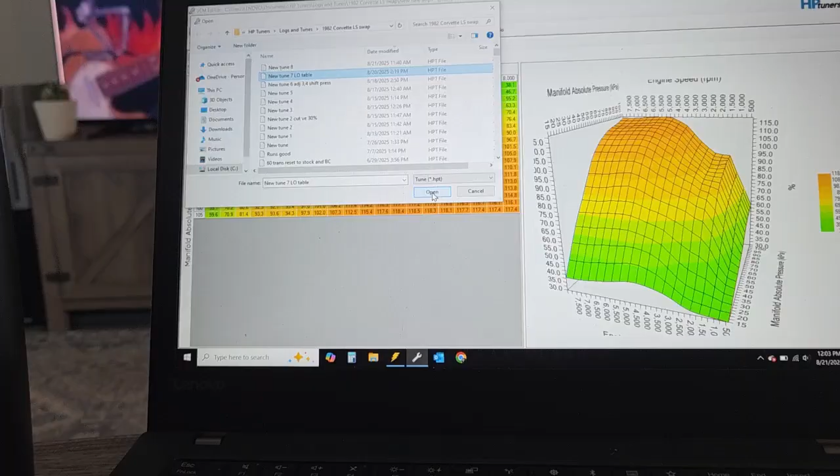If I bring up the last tune, the one I went out with this morning, which would be tune 7. So that's only 6 logs and 6 adjustments, and I'm done with the VE tune update. So here's where it's changed from, and you can see I haven't changed a whole lot. I bumped up the fueling up top in case it's starting to lean out.

Because again, up here, we're going to be running mostly off the mass airflow sensor. Anything above 4 grand, it mixes in mass airflow data and progressively more mass airflow as you get in higher RPM. So really, all I want is a decent base underneath the mass airflow. In other words, you couldn't leave these zeroed out because it's still going to reference it to some extent. So I want it to be close, but it's going to rely more on the mass airflow data.

So this is all pretty much flat up here, and that's why it's flat up here, because you're relying on mass airflow for subtle changes or for increasing fueling changes. And then you can see I bumped it a little bit, changed it a little here. What did we do?

So I leaned it a little through here where it was a little fat. I richened it a little here where those drop-offs were. This is the richening up here, and then a little bit of leaning in here just to get these idle fueling cells a little closer to where they should be. And these are transient, these are tip-ins, so I'm not too worried about that.

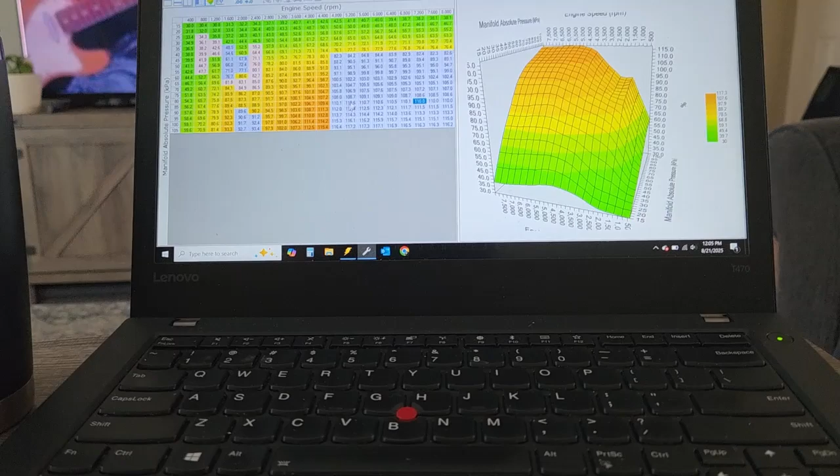So here we go. And keep in mind also, when you're driving this down the street, when you're all finished, you're running short-term and long-term fuel trims. The long-term fuel trims have a map similar to the VE table that holds the last long-term trim data for that particular cell. So as the computer learns how it wants to run, it's going to adjust and hold long-term trim. It's going to have its own modifier table that modifies this.

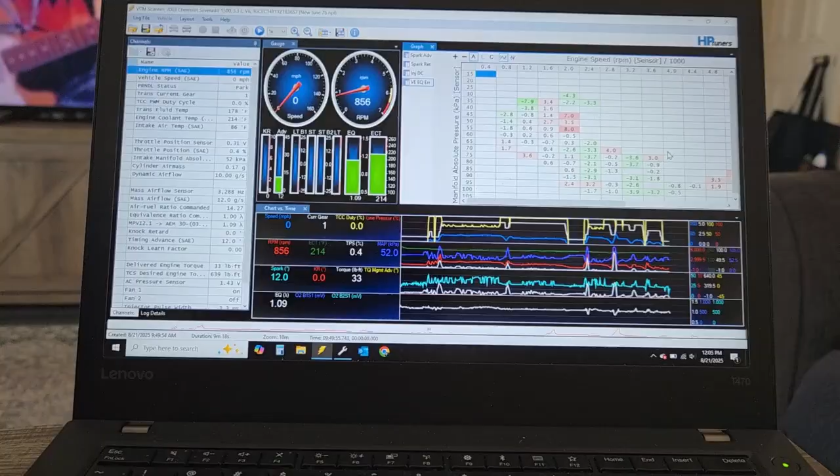So I'm not going to go crazy, and there's no point in going crazy trying to get every last little cell perfect, because that's constantly going to change, and the ECM has more than enough capability to compensate for 1.4, 1.7% lean. The long-term trim cell will set 1.4 rich, and so that'll balance out. And the short-term trims will be back at 0. And then they can float back and forth by 25% to change the mixture as you're driving, depending on your octane rating and engine temp and intake air temp and all that stuff.

So yeah, this is well close enough. 3%, 1.3, 0.5, 0.2. This is really close. So that's good, I'm ready to go. I've updated the VE table, so I'm confident that what I've put in here, and it's nice and smooth, is ready to go as a good solid VE table. So what I need to do right now is transfer it back so that I can go to run the mass airflow sensor. I want it to use dynamic air because I want it to read the mass airflow sensor, but I want it to read it from a low RPM so that I can scale the mass airflow.

Dynamic air is on this table under airflow and dynamic, and what you see now is high RPM disable, so it's not going to run or reference the mass airflow sensor below 4,000 RPM. So what you want to do is go in and change that to idle basically, or anything below idle. So at 100 RPM and up, it's going to start referencing the mass airflow sensor and use that for fueling, and I'll be able to use my wideband to determine whether the mass airflow data needs to be changed.

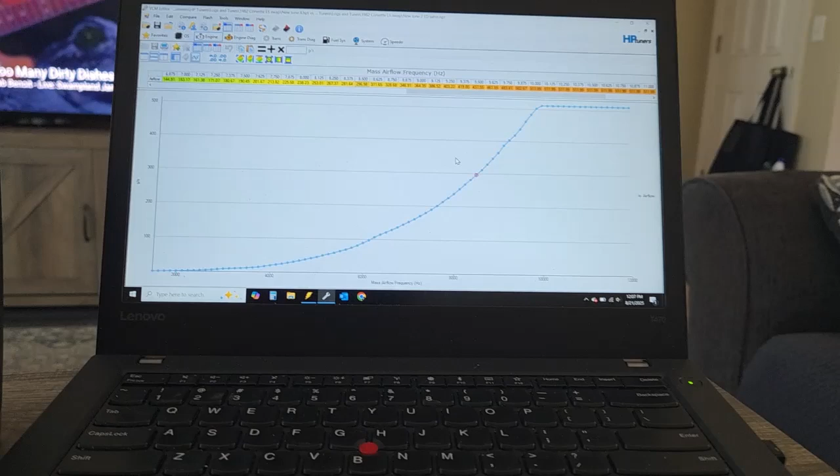And that's going to be mass airflow, airflow versus frequency. And as you can see, this is a single chart, a single line, so this is much easier to tune. It'll take, I don't know, 2, 3, 4 runs, and this thing should be tight. Now I'm expecting this to have to come way down because my injector data is now reduced up here as well. So I'm expecting this to flatline out. But we'll see, we'll take it for a couple of runs. And this is mass airflow frequency, not RPM, so make sure you realize.

So as you go up in RPM, the frequency increases. And as the RPM climbs, it determines how much fueling it needs at a particular mass airflow frequency. So what we did was come in to dynamic and we dropped the high RPM disable down to 100 RPM, so it'll reference the mass airflow immediately. And it's also going to reference the VE, and that's why it's important to do the VE first. I've tried to do it the other way around, and you can't eliminate the VE table from it completely. It'll always reference it. So if your VE table is jacked up, you're just chasing your tail trying to do a mass airflow tune on it.

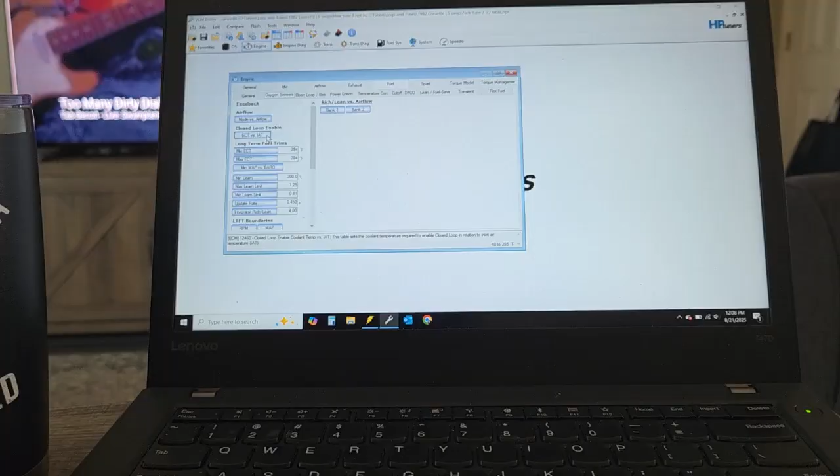So I swapped that over so it references the mass airflow at low RPM. Everything else is fine, you don't need to change. I still want it to be open loop, so closed loop enabled is going to be up max, so it never goes into closed loop. Long-term trims are shut off. Short-term trims are disabled. Everything is set the same way it was for the VE table. The only other thing I want to do is go up into engine diag and notice the mass air frequency fail is at 100 hertz because I wanted to fail it. I wanted it to run strictly off the VE table.

So I want to reverse that back. So we can look. Let me go back to my last tune when it was on. And so it was originally 13,500 hertz. So that way the ECM knows if the mass airflow is reading 13.5, it's gone bad. So I want to restore that. We'll go, oh, wait.

13.5. And then I'm going to go to my DTCs and I'm going to re-enable the check engine light for the mass airflow codes. And I'm going to change these back to fail on second error. That way if it has a fluke, it doesn't set a code and disable the MAF right off the bat. So that's back to factory settings.

And that's it. So my mass airflow is now re-enabled. It's going to start using it for dynamic air from 100 RPM up. So it'll give me an accurate reading on the mass airflow. What else did I want to talk about?

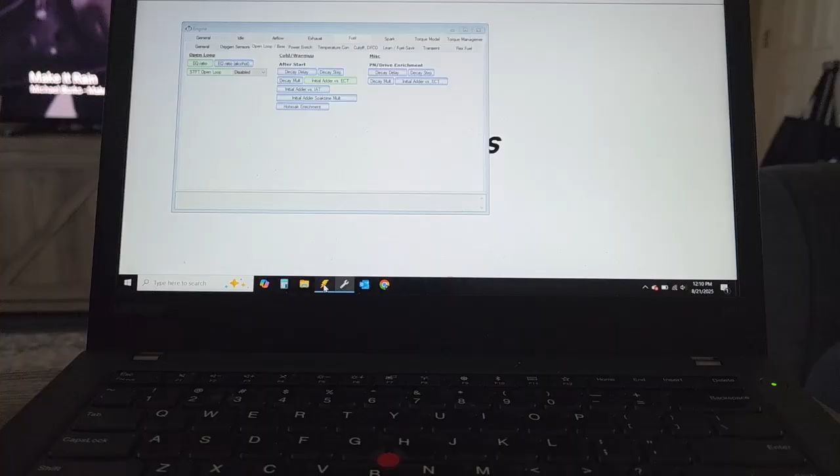Oh, a little tidbit that I found out relatively recently is that, as I'm going through these tunes and these logs, I like to keep an eye on my knock sensor, and if I'm getting into knock, maybe I'll take a degree or two out of the table as long as it's not an overly rich situation. Let's see, I had no knock through this. Let me see one of my prior logs. I think I had some knock on the last one. Yeah, so I had a little bit of knock in here.

And what you can do is if you're charting knock, I've got it right here in a red line. I can spot it right there. So here's the cells. I'm right in the middle of where it was picking up knock. I go back to my VE scan, and it's not overly lean. A lot of times you'll see lean. If you're overly lean, it'll start to knock because it runs super lean and cylinder temps go up. So that's legitimate knock right in this range.

So I went in and adjusted the timing back about a degree or degree and a half in most of this range to bring it down. And there you can see I brought it down in here, and I also did a little bit of smoothing to try and spread it out, and I gave myself a little timing in the mid-range here, just to kill two birds with one stone.

And if I go into the mass airflow tune logs, and it shows overly lean and knock in the same spot, I'm going to adjust that mixture first, unless I'm getting significant knock, like 5-8 degrees. But if it's just a half a degree of knock retard to get it back, the ECM is going to adjust the timing back if it picks up knock. So if it only has to move it by 0.8 or 1 degree, I'm not going to go back and adjust the timing table if I'm in a lean spot.

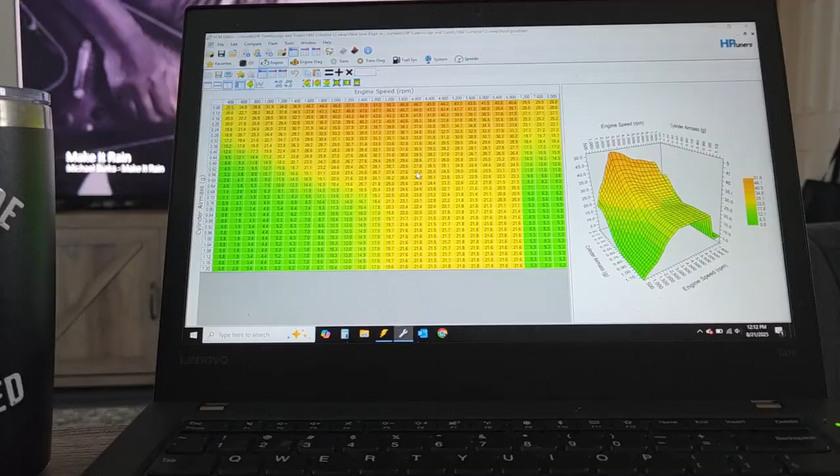Once I get the MAF more accurate, and there isn't a big lean area, and I'm still getting knock, then I'll go back and adjust the timing table. That's why timing is usually last. And you'll never get the timing table nailed down perfectly unless you run on a dyno. The only way to really get timing perfect is to run on the dyno and keep bumping timing and see where the horsepower starts to fall off, where you're starting to get knock, and go from there. But I can get it close.

I mean, I know this motor is going to want to run around 22, maybe 23 degrees. As you can see, I'm still shy of that. This ramp is going to be a bit different, so that's why I'm adding a little timing in here to see if I can get some more timing going in under load at part throttle before I get to wide open throttle out here.

Something else to notice also, now that I've got the VE table adjusted, is the highest I'm getting as far as cylinder air mass, and this is what tipped me off to the problem to start with. When I ran earlier, let's go back to here with the old injector scale. I don't know if that had any wide open throttle pulls in it.

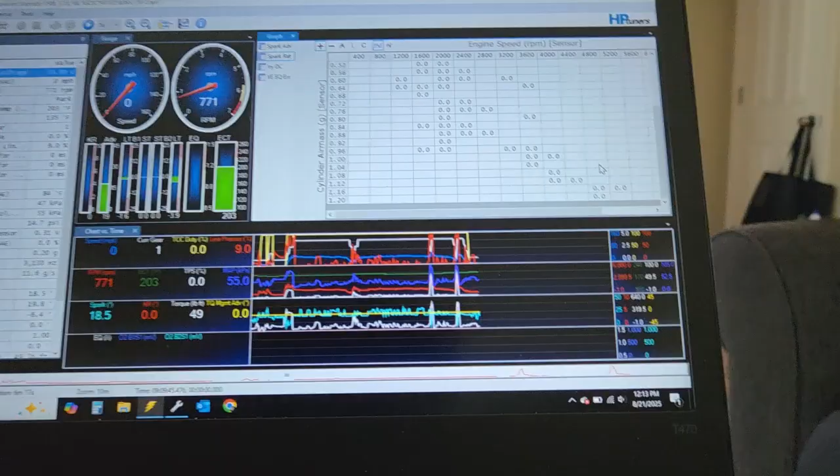Here's a good one. So this had a wide open throttle pull in it, up to 5,400, 5,500 RPM, something like that. But as you can see, at wide open throttle, at high RPM, this is right about coming on the cam here, about 5 grand. It's getting real close to peak horsepower up there. I'm already maxing the cylinder air mass chart. Its calculated cylinder air mass is already at the top of the chart. So I'm going to run out of cylinder air mass chart, and obviously my injector data is way off. And this is what tipped me off.

And like, man, I'm never going to get the timing right because I'm running out of table. So now that I've done the retune with the correct VE numbers, or much closer VE numbers, with a wide open throttle pull, I'm at 80. I'm nowhere near the top of the chart, which is perfect. That's where I want to be.

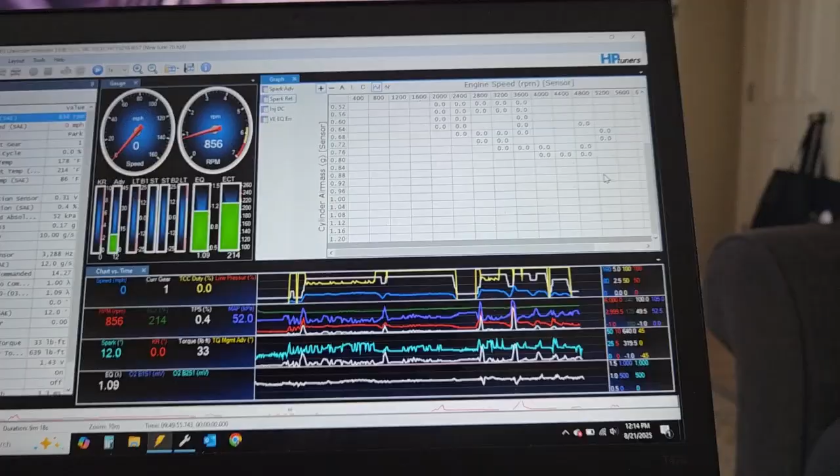And as I get up in RPM, and I had backed off the throttle, that's why it dropped down here at 5 grand. As I'm running these mass airflow tunes now, you're going to see this climb a little more, but I wouldn't expect to see it go any higher than 0.88, something like that at a max. But so this gets me back in a good working range for the timing tables.

Now, something to consider is that when you have the mass airflow sensor disabled doing the VE tune, which I did, the computer is automatically going to revert to the low octane table. So if you're making subtle timing changes because you're hitting a little too much knock during the course of tuning, and you're adjusting it on the high octane table, they're never going to have an effect because it's referencing the low octane table. So it's important that every time you change the timing, you match these.

So if you go in and you change the timing a little bit on this high octane table, take the whole table, copy it over to the low octane. That way when it references the low octane during the VE tune, it's going to show the same timing changes. Once you get all done with your timing tune, you can take your high octane table, copy it to the low octane, and then go in and let's say take out 4 degrees anywhere outside of idle. So here to here. Chop like 4 degrees out of it and use that as your low octane under load at RPM.

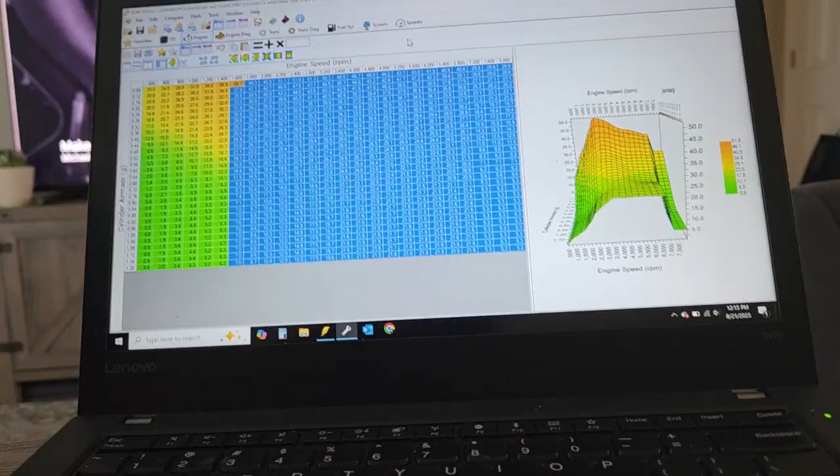So that way if you get a batch of bad gas or something and it starts picking up a lot of knock, when it picks up enough knock, it'll revert down to the low octane table because the computer is going to assume that you have low octane fuel, and you want it to be able to have some timing backed off without riding on the knock sensor the whole time every time you touch the throttle. So make sure when you're doing any adjustments to your timing map, you're copying them to the correct table or copying them to both tables.

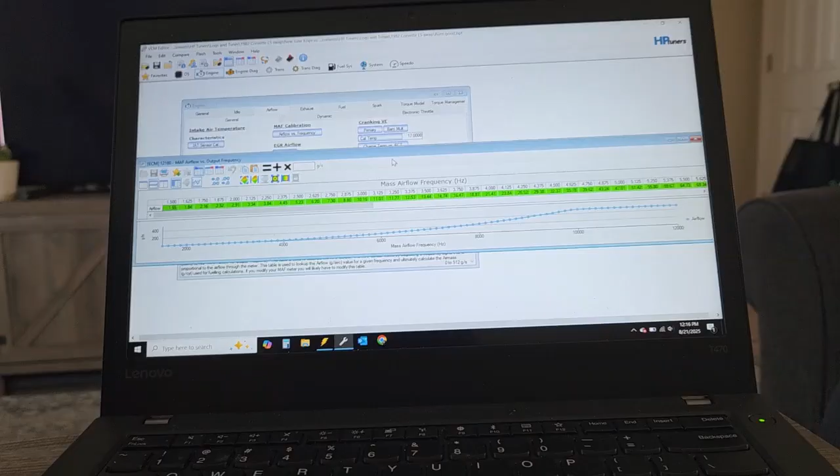So once you're done with the tune, then you can go in and knock the low octane down a few degrees to get yourself some headroom in case you actually do get bad gas. And that's it. So I'm going to load this in with the mass airflow sensor active and take it out on the mass airflow calibration run. I'm sure it's going to run like dog shit. Let me save my tune. It's going to run like poop, I'm sure, because the mass airflow is still scaled to the old injector flow rate.

So like I said, I'm sure this will flatten out some. Let me compare to the stock one. That'll be a good reference. If I go back to the original calibration on this mass airflow sensor. So this was the manufacturer's original calibration for this mass airflow sensor, so how much air volume it's flowing for frequency. So as you can see, that's the original. And then that's the last tune with the bad injector data.

So you can see how much it ramped it up trying to add more and more fuel because the injectors weren't flowing as much. I'm not going to bother pumping this up right now. I'll bring this down. If I get out on the first run and it looks like I'm much closer to the original calibration, I may just copy the original calibration over and run from there. But let's get it out on the road and see what it does.

Oh yeah, and I should note that I'm accompanied by the Tiger Dog. Hello, Maggie girl. She's keeping me company here, giving me tuning advice. She's taking a break apparently from sleeping like she worked a double shift at the Fritos factory. Oh. Yeah, I know. This couch's not big enough. We need a bigger one for you. All right, go girl.